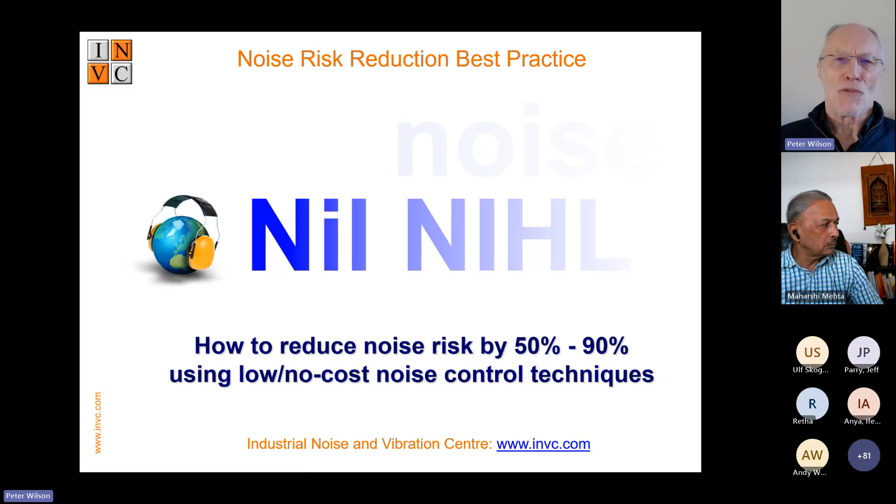So what I'm going to be doing today is talking about 4 of the elephants in the room as far as risk reduction is concerned. There's a phrase, don't mention the elephant in the room - it's a very obvious thing, but no one mentions it because it's embarrassing. So I'm going to be talking about the 4 elephants in the room of noise risk reduction, but mainly about noise control.

So current risk reduction practices worldwide have failed. There's still millions of people getting hearing damage. In the UK, there's a tsunami of hearing damage claims. And this is all despite the fact that noise-induced hearing loss is 100% preventable. The reason people are still going deaf is because people aren't implementing best practice and making sure that people are actually protecting themselves.

Recent research has really made this more urgent in the fact that, for example, over the last few years, there has been a lot of research on the links between dementia and hearing loss. Mild hearing loss doubles your chance of developing dementia. For moderate hearing loss, it's a factor of 3. And if you have severe hearing loss, you're 5 times more likely to develop dementia.

Noise-induced hearing loss, or hearing loss, is the single most modifiable risk factor in you developing dementia. It's very close to my heart - my mother is dying of dementia at the moment. It's just one of those factors that your hearing is such an important part of your brain activity. When you lose it, you are likely to get dementia.

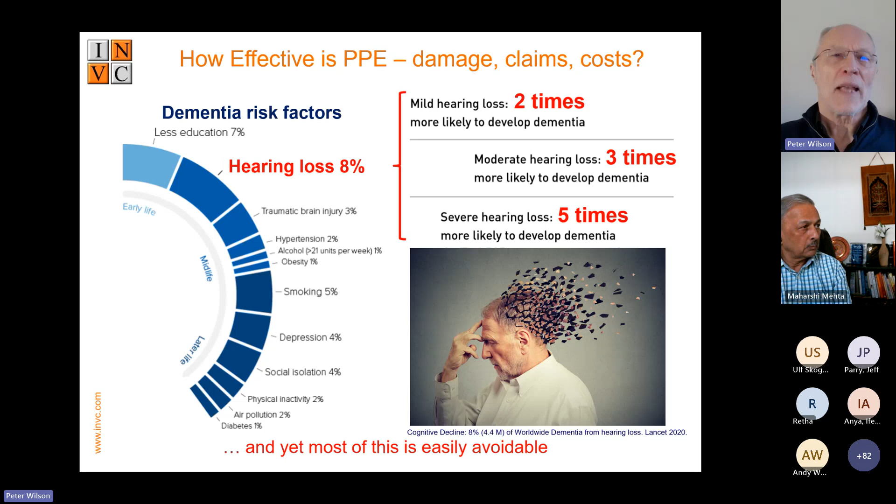So this is absolutely a massive thing that people don't normally consider. People normally just talk about hearing loss, but this is another factor that is extremely influenced by any noise-induced hearing loss. In addition, in the UK, the statistics for other factors involved in hearing loss show that if you have significant hearing loss, you are 42% more likely to be unemployed, 8% more likelihood of early retirement, and you double your likelihood of having a significant accident.

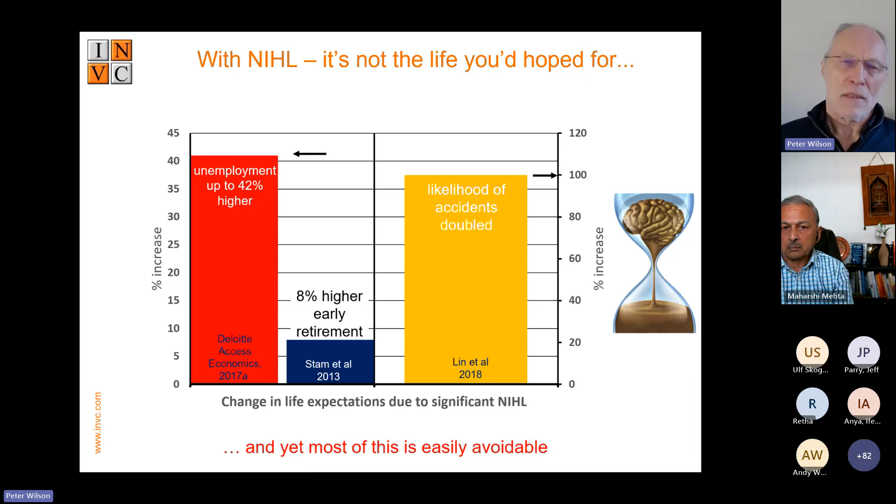So these are all, if you like, outside of the normal consideration of hearing damage. People just say, oh, you're losing your hearing, speech is more difficult to understand, you get tinnitus and so on. But these are other factors that also affect your life. So these are very serious things.

Noise exposure is costly in terms of health. It's also costly in terms of money and company expenditure on resources to reduce risks. So the costs to operators and staff include noise-induced hearing loss, tinnitus, dementia, and the other things I've talked about.

Direct costs, so financial costs, the cost of PPE - the direct costs of PPE and the indirect costs. In other words, how much attenuation do you actually get from your PPE? There are also costs involved in audiometry in most countries, in that you have to carry out audiometry.

Unfortunately, traditional audiometry is not a useful risk reduction exercise. It's a checkbox exercise. Motivationally, perhaps it's useful, but not otherwise, not using conventional audiometry. There are also the massive hassles associated with noise risk management, policing, claims, organizing audiometry, and so on. There's also the personnel involved.

High noise levels make working conditions worse and make communication more difficult. In addition, there's also the fact of risk assessments, the ongoing costs of getting reports. And unfortunately, the noise industry is predicated on measurement.

Fundamentally, a lot of organizations get regular noise reports that just tell them what they already know. You still have a problem, and it's more difficult to tackle those problems.

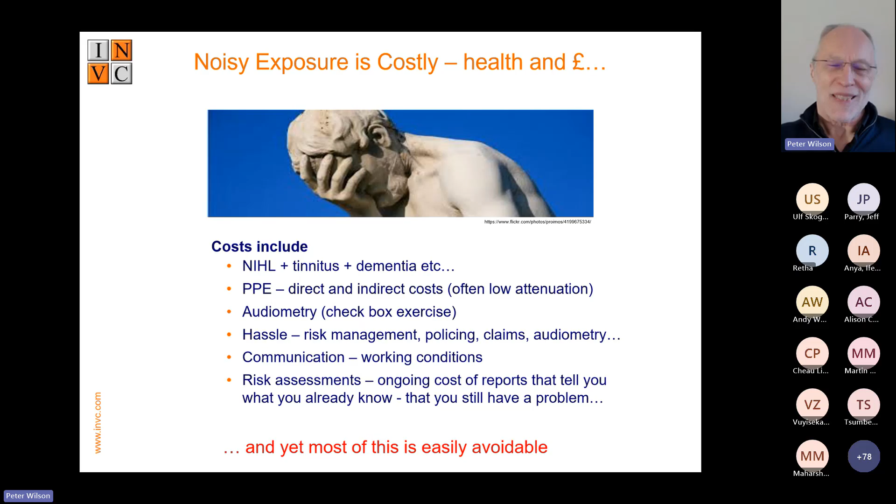So looking at the 4 key elephants in the room that people get wrong or don't discuss. Risk assessments for a start. That's the preliminary thing: how risky is it? Why do we keep repeating risk assessments over and over? Most risk assessments are very poor quality placebo exercises. In the UK, HSE research says most noise reports are inadequate, which is politely saying they're not good at all. We see a massive number of reports because of the training courses we run, and I completely agree with the HSE: the standard reporting is terrible.

Hearing protection is the first aid measure that is always introduced, and most hearing conservation programs are based on the use of hearing protection. There are huge assumptions that are just wrong, so people suffer unnecessary damage without knowing it because they assume they're sufficiently protected.

Noise control is an enormous factor because most people assume it's not practical, since the knowledge of modern low-cost noise control engineering is frankly abysmal. As an engineer, I find it really, really depressing. So I'll be talking about that mainly today.

And audiometry, if I mention that, it's largely a placebo checkbox exercise, but it doesn't have to be. It can be made useful, and there's newish technology now available that really helps with that.

So starting off with risk assessments, this is an index of one of our comprehensive risk assessments, where a company really wants to start from scratch and get everything down. The bit that's missing in virtually all risk assessments is a noise control audit. You just don't get any information at all about noise control other than copy and pasted stuff from the internet. So I'll be talking about that mainly today.

One of the things you need to do for risk assessments is what we have at the front of the assessment: a 1 to 2 page action plan document. The only reason you're carrying out a risk assessment is to work out what you need to do to reduce the risks. So the action plan we pull out can be put on someone's desk. This is what you should be doing. It's simple, it's not scary, you don't have to read much, but we have links to the page number, the due date, who should be doing it, and when it's completed. So you're keeping track of what actions are taken.

In addition, most risk reports are just not useful documents. They're written perhaps for people who like to show how much they know about noise, rather than for a manager who knows nothing about noise and just wants to know what they're going to do.

So this is a video extract showing one of our risk assessment reports. Basically, for a factory, it's based on the factory plan. What we have is a PDF document which has got all the information you need on it. It's got noise levels, color coded, so if it's red, it means the noise dose is above 85 and hearing protection is compulsory. There are also pictures to remind people which pieces of kit should be there, and you can also have sound samples.

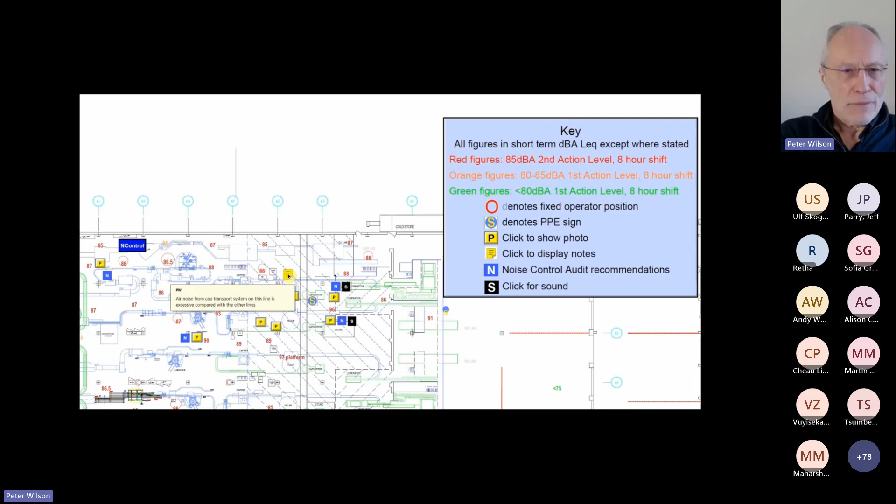And comments - in this case, this line is particularly noisy, but there's also noise control information. So in this particular case, this conveyor's noise can be reduced by 12 dBA at a cost of about £200, and it also reduces the wear in the conveyor.

So this is a document designed for the engineer implementing the noise control measures. There's a comment section here, and also material suppliers, so when they're doing the work, you can capture their expertise of how they fixed the problem in notes from the engineer. So when that engineer moves job or leaves, follow-on engineers can copy what they did on other items of plant and learn from what's been done in the past. It's turning it into a useful document.

As far as PPE is concerned, these graphs are from 1996, so this is a long time ago - nearly 30 years ago. This knowledge has been available for all that length of time, but virtually nobody makes use of it or even really understands it. So the top one is earplugs - in yellow, we have the manufacturer's data, attenuation between about 15 and nearly 30 dB.

In red is what you actually get when you measure it, and that's as low as 2 to 3 dB. So basically for these earplugs, you're talking about between 2 dB and around 10 dB if you're lucky. For earmuffs, the situation is slightly better, but it's still around 10 to 15 dB maximum, no matter what the manufacturer says. This is something that people don't discuss.

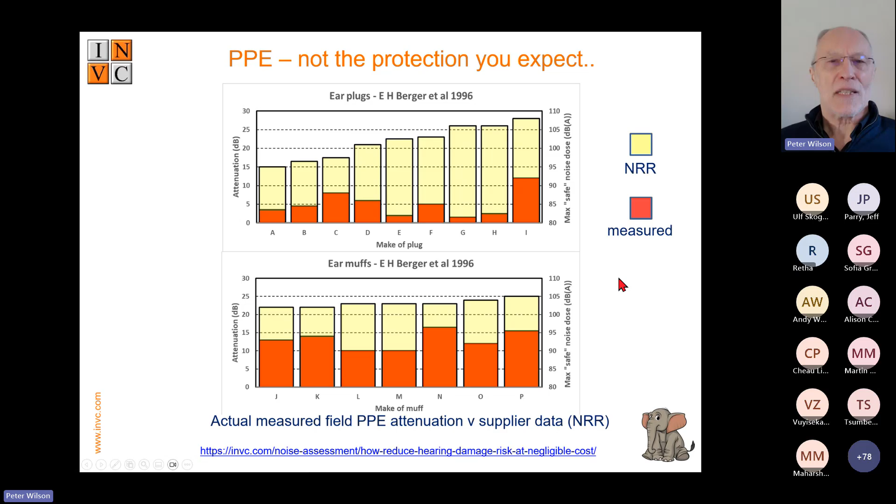The manufacturers know this, but they don't make it general knowledge. So it's a very serious issue that if you need 20 dB or 15 dB attenuation, you're only getting 2 to 5 dB in practice. This is a very serious thing.

So if we look at that, why doesn't it work? With earplugs, they're rarely fitted correctly because you need to put them fully into the ears rather than having them dangling out of your ear like a cigarette end. So 20 to 30 dB potentially from the manufacturer, poorly fitted, as low as 2 dB.

Earmuffs, there's less variation because it's easier to fit them correctly, but you can only really get 10 to 17 dB hearing protection, no matter what protector you use in practice.

The other thing is wear rate. This is one of the really key elephants in the room, because it should be 100% in a noise hazard zone, but it almost never is. And unless you know what the wear rate actually is, not what you assume it is, you have no idea of the protection you're getting. So these plots here are showing you the sort of noise level.

From the manufacturer's data for plugs, you're expecting 15 to 30 dB, and what you're getting is between 2 and about 12 dB. For earmuffs, you're expecting 20 to 30 dB, and what you're getting is about 5 to 15 or 16, 17 dB.

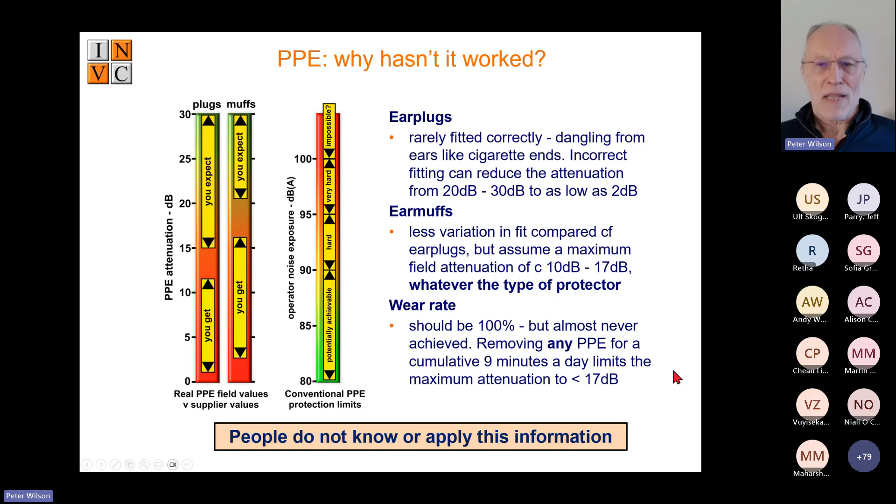So what this means in practical terms is up to 90 dBA, hearing protection is potentially achievable with reasonable enforcement. Between 90 and 95 dB, it is difficult to guarantee adequate protection. Above 95 dBA, it's very hard, and above 100 dBA, it's virtually impossible. Not many people know this or really understand this or apply this information.

And one of the killers is the wear rate. This graph shows the attenuation you get. Along the x-axis, we have the number of hours in an 8-hour shift that you wear your hearing protection. So in practice, you're only ever going to get around 99% wear rate, which means for plugs, the maximum performance you can ever get is 10 dB, and for muffs, it's 17 dB.

If you take them off for 2 hours in your 8-hour shift, or you're just wearing them for 3/4 of the time in noise exposure, the maximum attenuation you can get is 5 or 6 dB. Doesn't matter what you're wearing. The wear rate determines your protection.

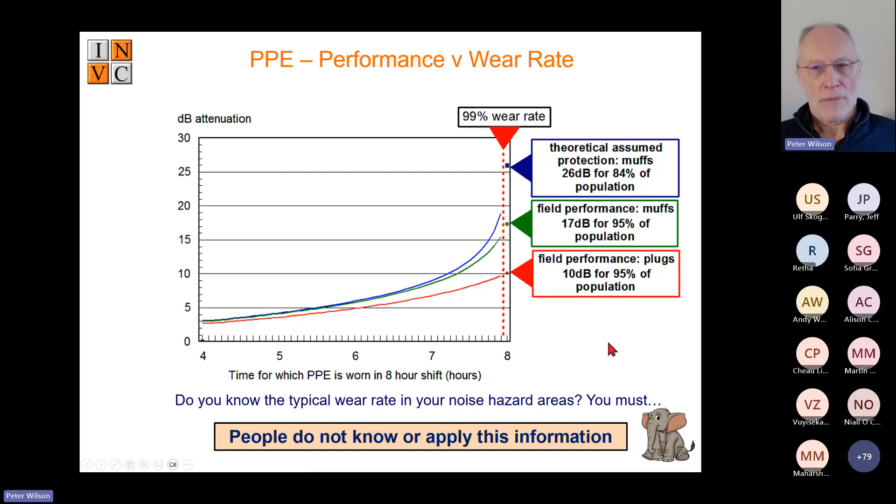Now, pure tone audiometry is, if you like, the gold standard that everyone uses. The trouble is, it simply catalogues that you've messed up - the fact that people have had hearing damage 5, 10, 15 years down the road. So all you can do with conventional audiometry is say, oh, I'm sorry, you've had hearing damage over the last 10 years. It's too late to correct that, but sorry about that. It's a lagging indicator, so as far as risk reduction is concerned, it's a placebo checkbox exercise.

It is useful in terms of motivation, in that you take someone aside every couple of years or so and talk to them about their hearing. But the results are that it will not pick up the early stages. So all you're doing is documenting the fact that someone has hearing damage or doesn't have hearing damage. In the UK, the HSE have said that conventional audiometry is a tax on the failure to control risk - it is not a risk management tool.

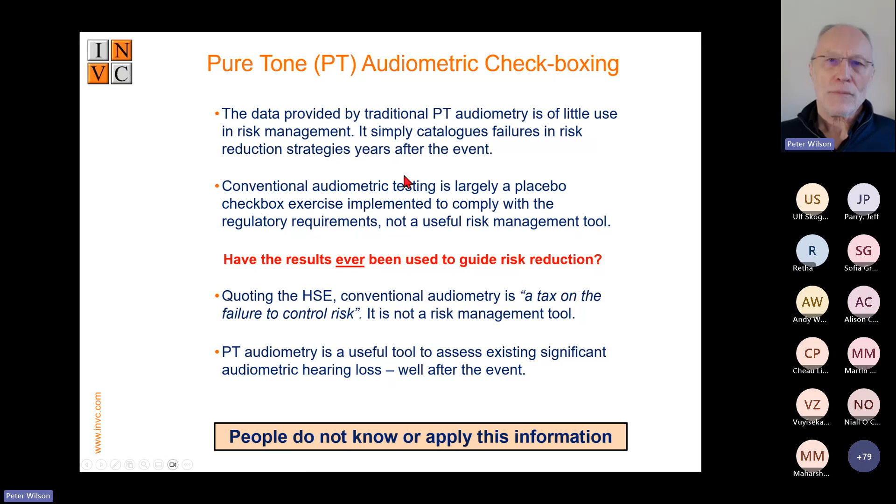It doesn't have to be. Instead of pure tone audiometry, we recommend, if you can, investigating otoacoustic emission. This has been used to test the hearing of children for decades. Now there's an industrial version, which has been around for a few years.

And the advantages are, if we're comparing conventional pure tone audiometry with OAE, OAE detects the very early stages. So you can say last year you had 12% damage to your hair cells, this year you have 18%. So you know something is going wrong within a year. You can then say, what has gone wrong? You're not wearing your hearing protection, or we haven't picked up a risk that you're getting damage from, and you can do something about it. So it becomes a risk management tool. It's also very, very easily understood - it's percentage damage.

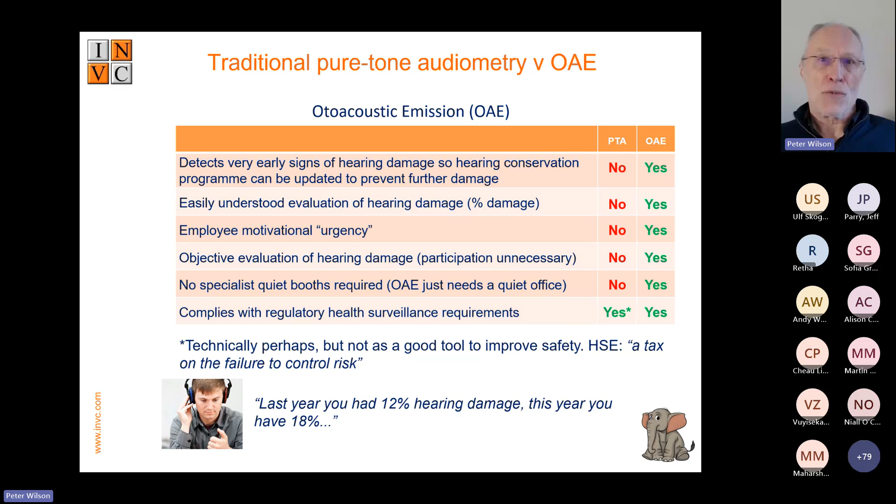It's very good for motivation because it's urgent - you have got this much damage since last year. It's also objective, there's no subjectivity about it. So you don't need to participate, you don't need to tell people what they need to do, you just press a button and it gives you the answer. You don't need quiet booths, it can be done in a quiet office, and it complies with all regulatory health surveillance requirements, as does conventional audiometry, technically speaking, but not in reality.

And now we come to noise control. Where you have a 3 dB rule, double the energy is double the risk, because risk is directly proportional to noise energy. So if you have a 3 dB exchange rate, which is the most common generally accepted one, risk is directly proportional to the total amount of energy entering your ears. 3 decibels is double the energy, so that's a 50% increase or reduction in risk. Every time you add 3 dB, you're doubling the risk.

So if you're looking at noise control, one of the problems is that people will say, well, it's 100 dBA, there's no point doing anything if I can't get it below 85, because at 85 we don't have to wear hearing protection. At 100 dBA, I can tell you those people are not adequately protected. If you reduce it from 100 down to 97, you have halved the risk. If you reduce it from 100 down to 94, a 6 dB reduction, you have reduced the risk by 75%. And a 10 dB noise reduction means you have reduced the risk by 90%. So if you can get it down from 100 dBA to 90 dBA, hearing protection is still mandatory, but it works - people can be protected at that level, whereas they cannot be protected at 100 dBA.

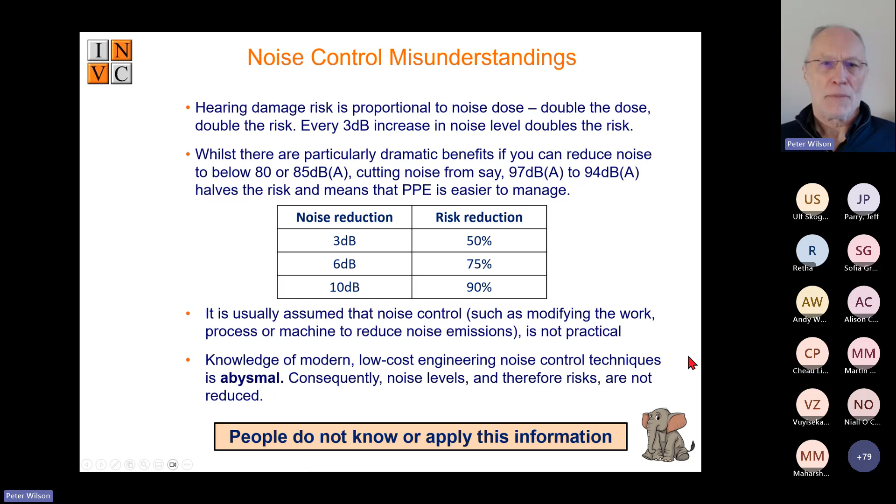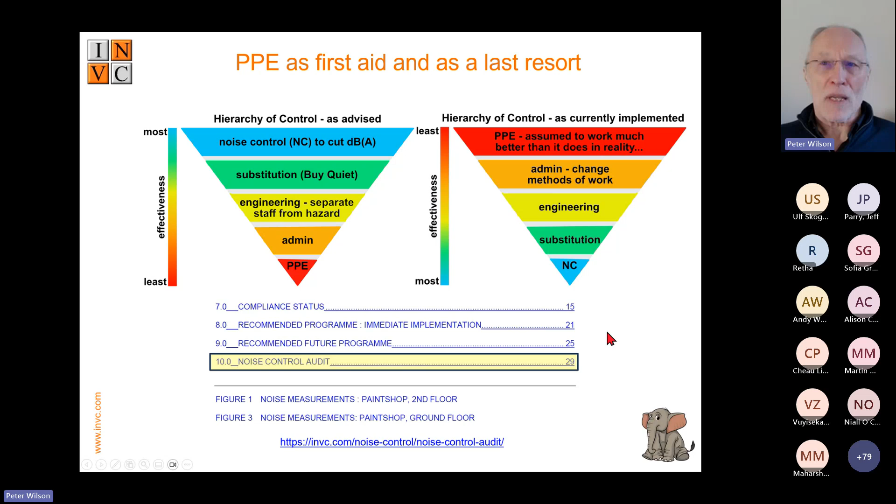As health professionals, occupational hygiene professionals, you know this hierarchy of control - the first thing you do is cut the risk. For noise control, it should be noise control, because that eliminates or reduces the risk. Then substitution, then separation, then admin, and then PPE as a last resort. For noise, it's the opposite way up - noise assessment reports will always say the first thing you do is PPE. Fair enough as first aid, but that's it. No one considers the other measures in any great seriousness in most circumstances. This is a big problem because PPE is not nearly as effective as people think in practice.

And the problem is attitude to noise control. A typical discussion you get in health and safety across the world is, let's look at noise. Noise has become a topic because you had a hearing damage claim, or it's just come to the top of the pile. So let's look at noise control. At the meeting, we've had quotes for enclosures, and they're exorbitant, massive costs, and the maintenance engineers would hate them, and hygiene would be a big issue, and so on. So it's not going to be practical. Moving on.

There's a tendency to regard noise control as a safety issue. It's not a safety issue - identifying the risk is a safety issue. As soon as you've done that, it becomes an engineering problem that should be addressed by engineering means, and that means accurate diagnosis. Again, virtually everybody involved in noise will look at a machine or a noisy line and treat it like a black box. That's it. They don't look at it as an engineer and ask, why is it noisy? And that's the key thing.

So for noise control to be effective, you must look at all the options, not just the high cost conventional palliatives such as enclosures and barriers and silencers. You should only use those palliatives when you can prove there's no engineering alternative. And all these techniques are additive.

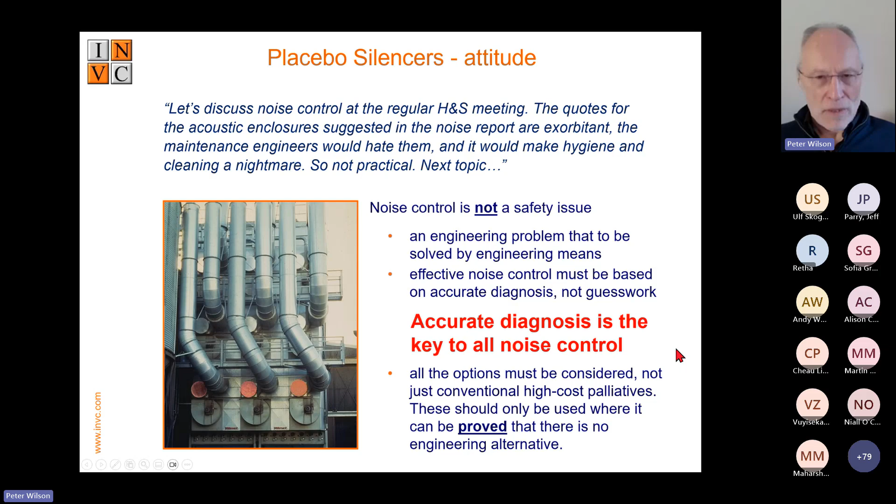So to evaluate what your noise control options are, you need to carry out a noise control audit, which is a cost-benefit analysis. This is taken from a previous project. There's a site with scrap fans pulling things off the lines, crowding conveyors, filling machines, sorter capping machines, cartoners, and palletizing. Current noise levels shown here are pretty high, up to 98 dBA.

One of our engineers went on site and did diagnostic measurements and worked out what the noise control options are and what the cost would be. So to get the noise level down from 98 to 76 cost about £3,500, and so on. In each case, we're saying these are the predicted noise levels you can achieve for these costs.

If you add all that together, you get the total cost of the noise control program, which would give you a maximum noise level of 83, down from 98, and the estimated annual maintenance costs are around £3,000, but you'd be saving £1,000 on compressed air.

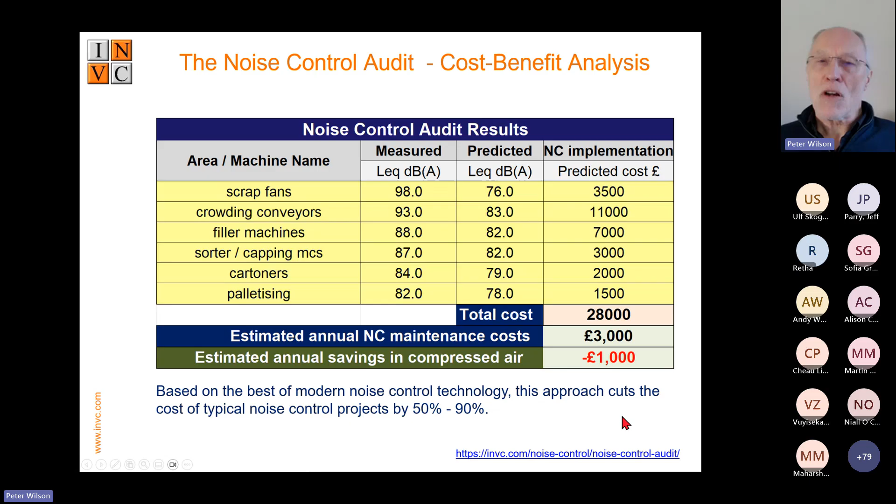So then you know what the cost is going to be, and you know what the benefit is going to be. In this particular case, when you worked out the noise dose of the people working in these areas, all the noise doses were well below 85, and most were well below 80.

So in most areas, hearing protection would no longer be required at all. You then look at the real costs of PPE. The first thing we do is use a real-world PPE performance calculator. In this case, you put in the type of muffs - these are ear muffs, and the manufacturer's data says 24 dB.

The wear rate we've seen is 70%. They're wearing safety glasses, they've had fit testing. The cost per head per annum is £180, and the number of staff wearing them is 50. So the total capital cost per annum is £9,000.

But you're only getting about 5 dBA noise reduction. So you say, okay, I'm spending £9,000 a year and I'm only getting 5 dB.

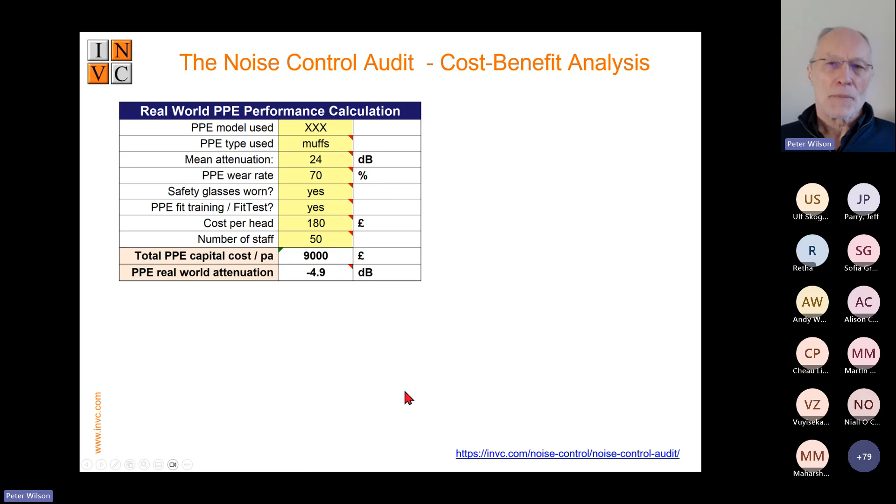And if you put that cost figure, and then add in the other costs such as noise surveys per annum, audiometry per annum, admin per annum, insurance per annum - the increased insurance cost because you've got noise problems - any claims, staff turnover and absentees, you can put in some notional figures for that, and it comes out to around £15,500 per year.

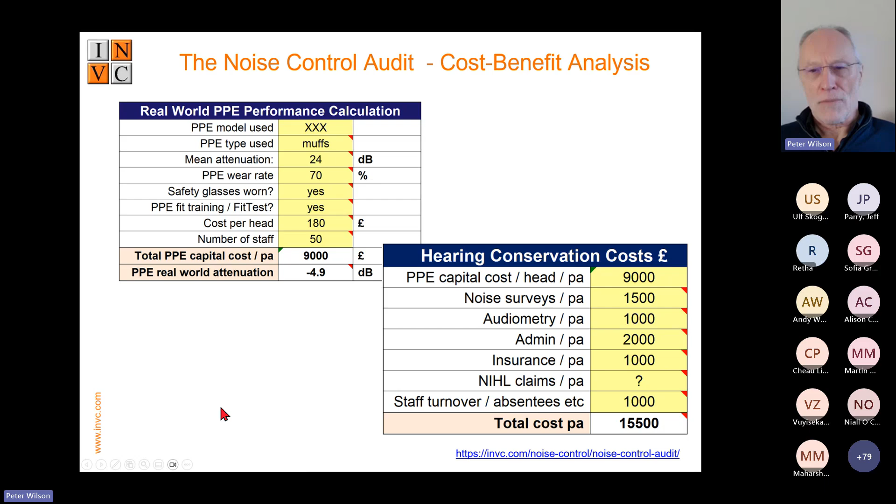So you've worked out the cost of the noise control, you've worked out the cost of PPE and the benefits of PPE, and you can then plot this on a graph. This graph shows years against cost.

So what we have is the noise control cost in blue, with the maintenance costs adding to it. The green line is the cost of having a noise control program implemented over the next 6 years, and that means no mandatory hearing protection anywhere.

And then you do the same for the PPE costs, which gives you the red line here. You can see the crossover point is about 2.5 years, which means after 2.5 years you're going to be saving money by going down the noise control route.

You also have to bear in mind that these PPE costs are for about 5 dB attenuation as found. So that would need to be improved, meaning you'd have to spend considerably more money, time and energy to improve that.

So that's what you're trying to do - you're trying to say, what are my noise control options and what would the cost be? With that information, you can make a judgment about spending money on PPE and noise control, or a mixture of both. What is the best option to reduce the risk to a minimum?

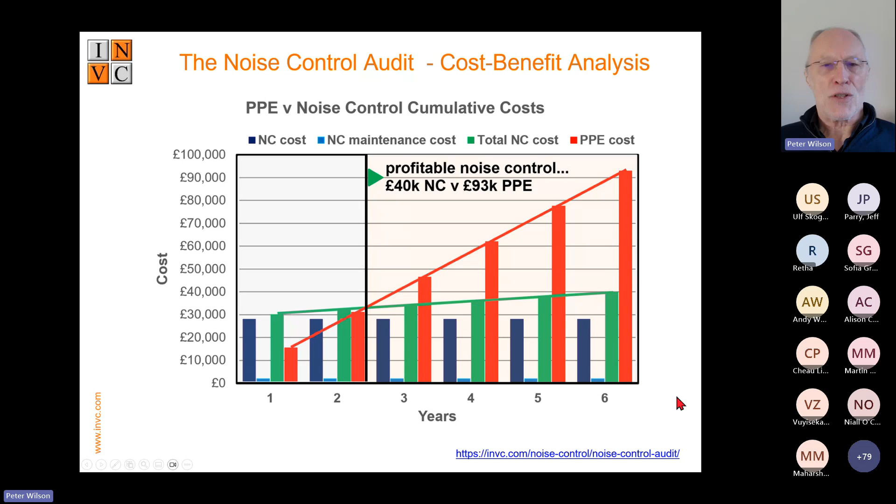Now, as far as knowledge of noise control is concerned, a few things that most people don't know: you can cut fan noise at source without using silencers by increasing fan efficiency. That's our first step when we are tackling fan noise problems.

There are also new materials. There's metamaterial barriers, which are amazing devices, 25% open area. They use geometric noise cancellation to stop the noise. So you can get 10 or 20 dB attenuation, but you're allowing 25% of the air through, so you can get cooling.

On air noise, silencing and nozzles, particularly nozzles used for transport of materials and so on, you can reduce the noise by 90% and use 20% less compressed air. So it's actually profitable, you'd do it even if noise wasn't an issue.

You can also get waterproof and very hygienic acoustic absorbent now, so that's no longer a problem.

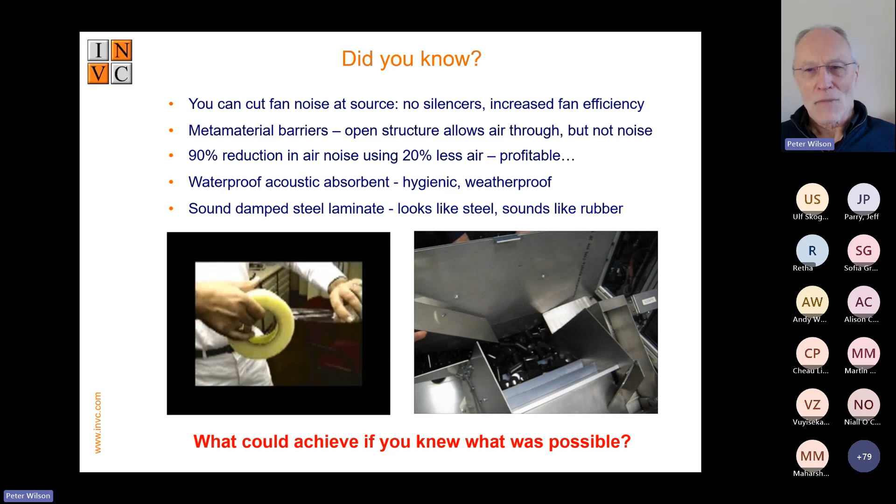And there's also, as an engineer, I really love this material, sound damped steel laminate. Looks like steel, sounds like rubber. I love it because it's very robust. You can swap it, it's a direct swap for a conventional steel sheet, or you can create it in situ. Here's an example of using a piece of sound damped steel against the deflector already in use on this machine. So all engineers should know about this stuff. It's only been around for 40 or 50 years, and it is used in automotive engineering quite a lot.

Another one I think is really cool, maybe I should get out more, but this is quiet sellotape, quiet tape. On packaging and cartoning, you think, why is tape noisy? Well, if you're cartoning and putting large strips of tape off a line, you can generate 100 dBA locally. Quite often, people are looking at fitting enclosures. Why not buy quiet tape?

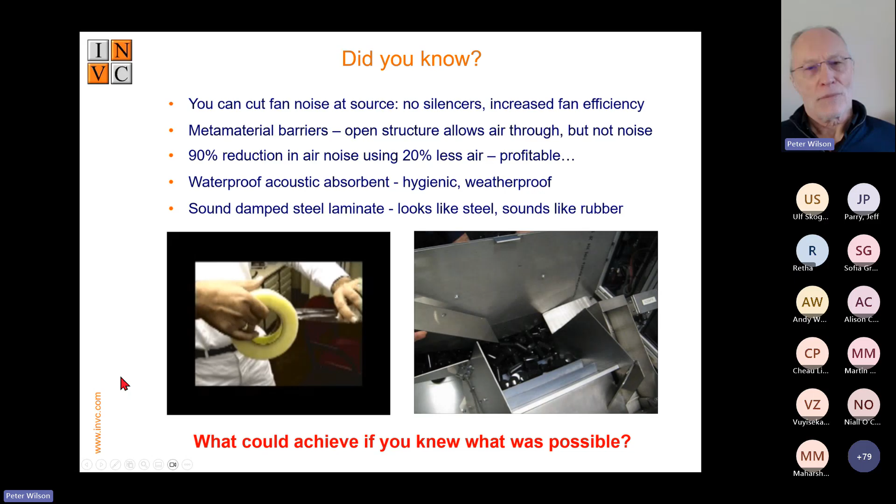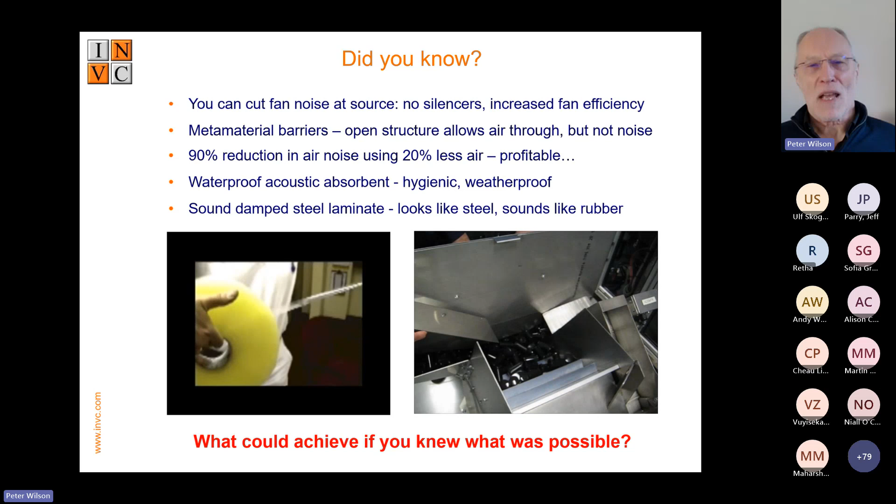Okay. Maybe I'm just very sad, but I think that's brilliant.

Also, when I set up INVC decades ago, we bought a narrowband frequency analyzer for diagnostic purposes. It cost the same as a small car. Now you can do it on a free app on your phone. So where you have noise that is tonal, the peaks in the noise at different frequencies can be related to mechanical activities such as gear mesh, fan blade pass frequencies and so on, and structural resonances. On a free app, you can determine what is causing that tone, what is causing that noise.

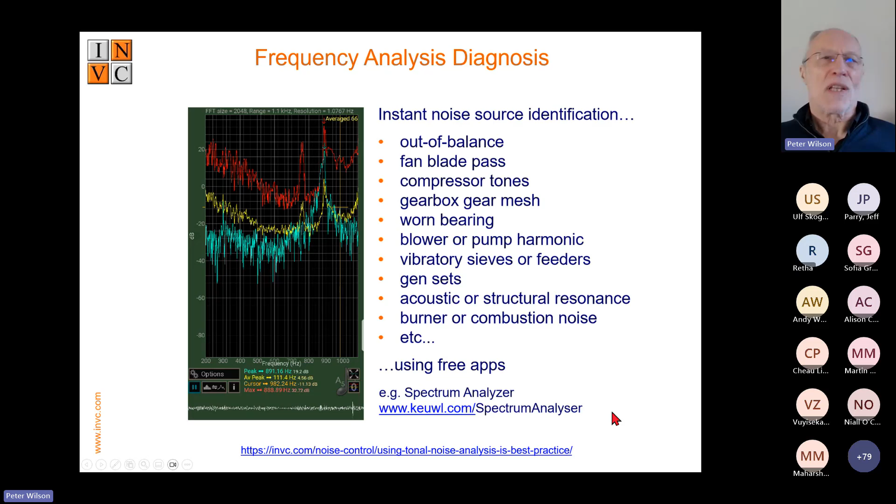We use this for diagnostic purposes all around the world. We do a massive number of projects now across the globe from our offices in Slough, just by analyzing smartphone data, or in this case, from a TV program.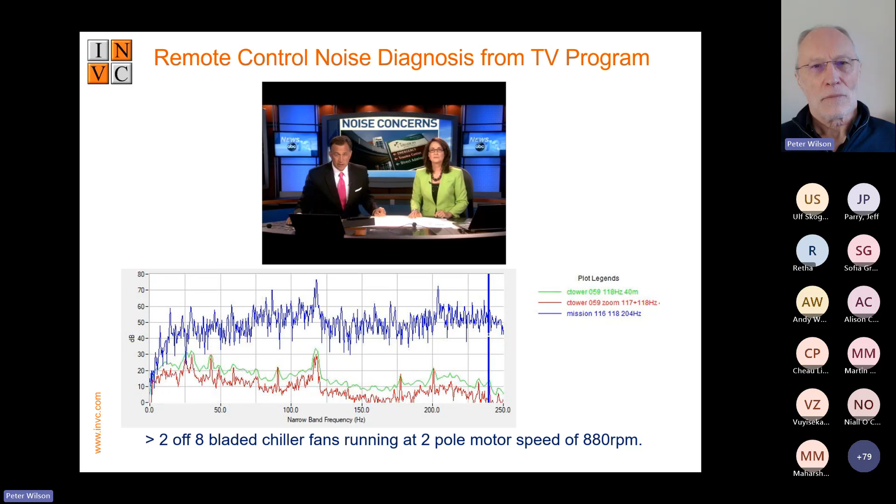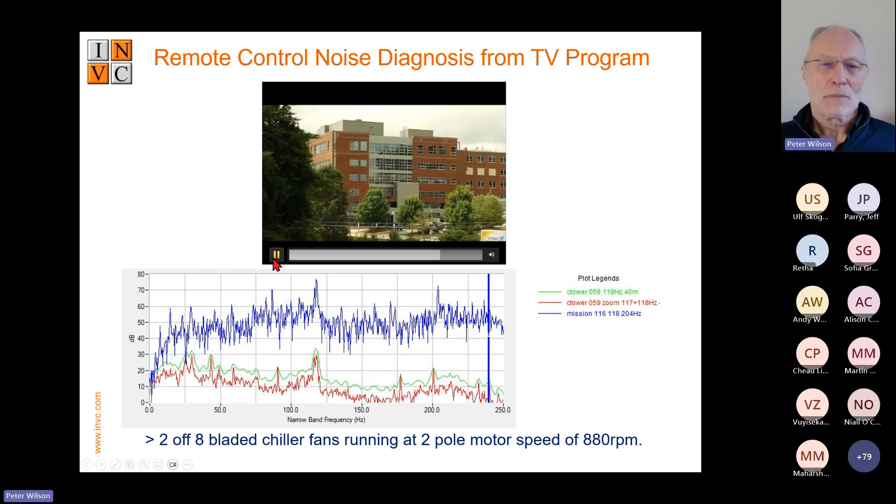Some homeowners who live near Mission Hospital say they're fed up with a constant humming. They also say Mission leaders aren't doing enough to fix it. News 13's Kimberly King talked with neighbors who are filing a complaint with the city. Listen closely, can you hear a constant hum? It's a sound residents say is coming from Mission Hospital.

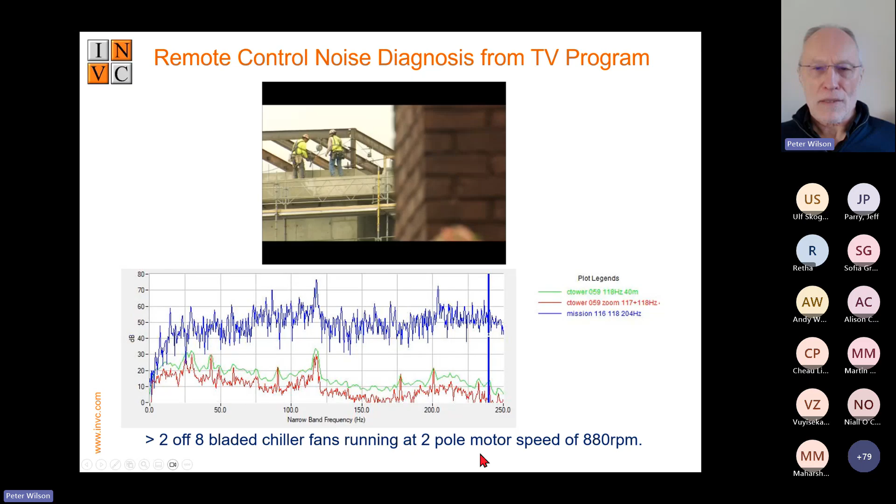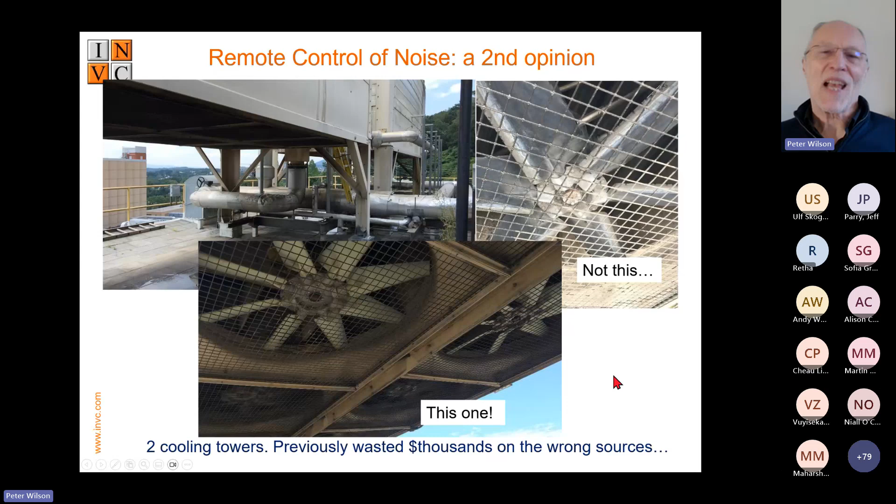From that sound sample, I did the frequency analysis and said, well, the problem is these two peaks here. I contacted them, and I had predicted that it would be 8-bladed fans, two of them running at a certain speed, and they had spent a lot of time and money on the wrong piece of kit because they hadn't done the diagnosis. So it wasn't these chillers, it was these chillers. That diagnostic, me spending 10 minutes analyzing that, told me exactly what the noise source was.

This is another example, the fastest noise control project we've ever done. Took 6 hours from the first phone call to the problem being completely diagnosed and them knowing exactly what they needed to do. This is a cooling tower.

They sent me a video clip, and from the analysis close to the tower at a distance, the problem is a tone at about 650 hertz, which was tied into the gearbox of the cooling tower. So once that had been done, instead of spending over £30,000 on replacing the whole unit, they just needed to replace a gear, which cost them £3,000. And that was all completed within 6 hours from the first contact.

This is an incredibly powerful diagnostic technique.

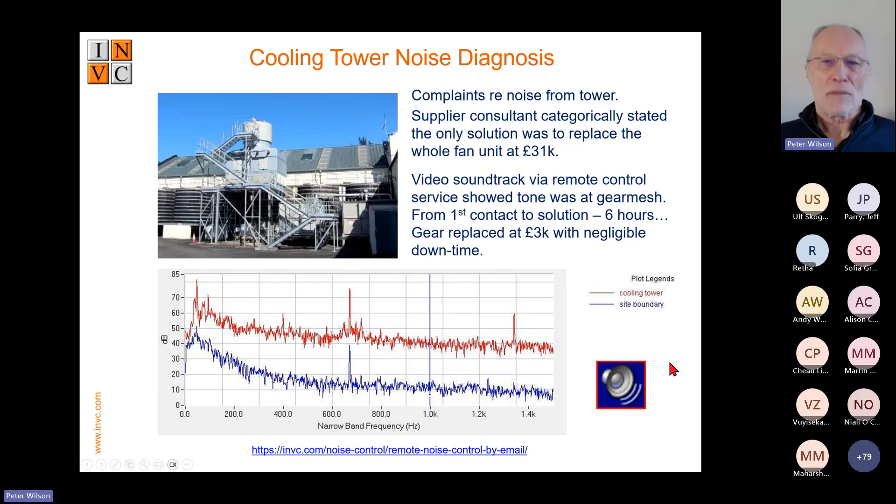As far as diagnosis is concerned, it's a way of thinking. You look at your noise sources and you say, why is it noisy? You need to rank the noise sources on your machine, your line, or your plant. Listen: does the noise happen at the end of the cycle, the beginning of the cycle? Is there a hum, a whine, a drone? A lot of engineers have used this for years - you've got a problem on a gearbox or an engine, you stick a screwdriver in your ear and listen to it, and you go, ah right, okay, is that a bearing?

Or you can run each source separately. On some machines, when you press the start button, the fan starts up, the motor starts up, and various other things all start at once. If you can get an electrician to massage the interlocks and try and run each bit separately - run the motor and gearbox, then separately run the compressed air, and then run the extract fan separately - you can say, right, which is the noisiest? Because the key thing is you start with the noisiest noise source and work down the list. Otherwise, you're not going to be successful.

Another thing you can do is buy acoustic matting and cover all the sources. This is a bit like a children's program where, with a pair of scissors and a Stanley knife, you make covers for each noise source, cover them all, and then uncover each one in turn. That tells you simply which is the noisiest part of the machine.

The power of this is illustrated by what would normally be considered a very difficult noise problem. This is a big power press. You've probably all lain awake at night wondering - if you've got a washing machine and you look inside, there's a perforated stainless steel drum - what machine puts all the holes in the stainless steel they make the drum from. Or maybe that's just me. So this is a machine that does exactly that.

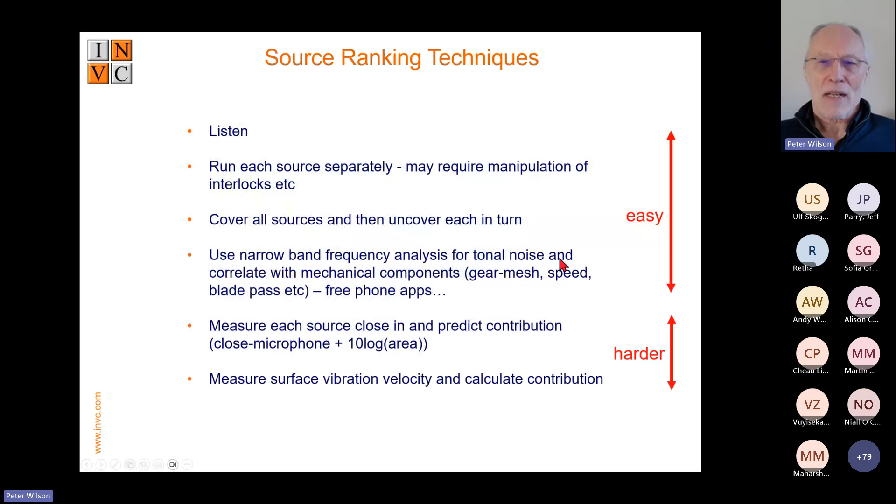You feed in the stainless steel sheet and it stamps out the holes. Now, this machine is generating 102 dBA, which means the whole area with a load of staff are all affected by the noise, not just the operator, and all have to wear hearing protection all the time. Now, the company were thinking of fitting an enclosure, which would have cost tens of thousands of pounds. They asked us to see if there's an alternative, because it would have been a big hassle and very difficult to operate with an enclosure around it for access and so on.

So the first thing to do is work out and make a list of the noise sources. We have the tooling banging away. We also have a pneumatic clutch that is operating the tool as well. You also have an extract fan, which is pulling out the scrap, and we have a separator that pulls out the scrap from the outlet of the fan.

So the first thing to do: run the press without the feed going through it. You can run everything else, and that's by far the dominant noise source. So we tackle that first.

With tooling modifications, which is really just regrinding the tool and modifying it slightly, we're down from 102 to 97 dBA. A good start.

But then the clutch is the dominant noise source - it's compressed air from this very bad silencer. So fitting a much better silencer, a straight-through silencer with no back pressure at all, fixing that, we're down to 95.

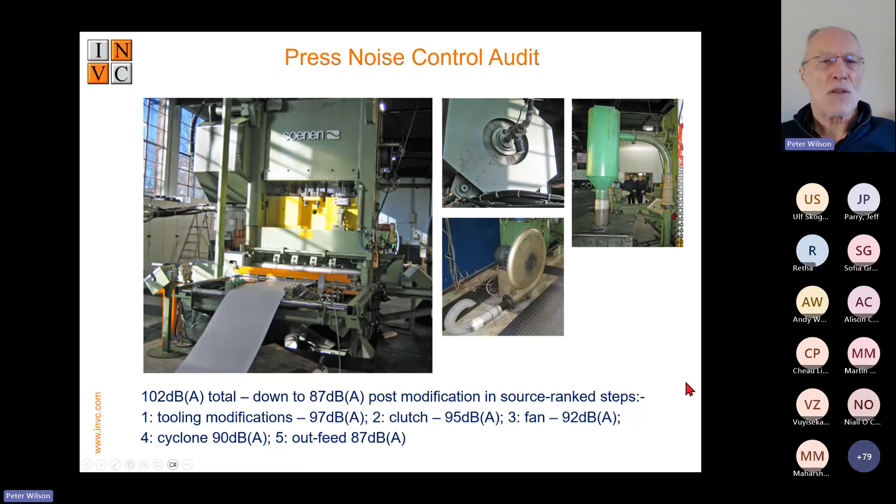So we're down from 102 to 87 dBA, which means you only need to wear hearing protection compulsorily within 2 meters of the press. The rest of the workshop is no longer a mandatory hearing protection area. And that lot cost a tiny, tiny fraction of an enclosure - instead of spending 40 or 50,000 pounds, it cost them about 5,000 pounds.

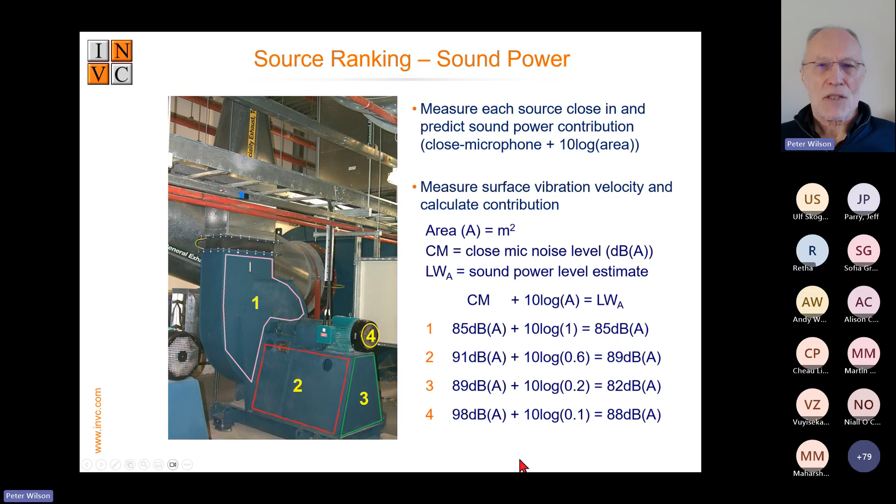So we're looking at using modern engineering noise control techniques, giving 50 to 90% cost savings - typically it will cost half as much or as little as 10% compared to using conventional noise control.

For pneumatic noise, you have zero back pressure silencers - there is no excuse for pneumatic noise from exhaust silencers, and I'll come to that in more detail a bit later on. If you're using nozzles, there are off-the-shelf nozzles that use 20% less compressed air and are 10 dB quieter or even more.

For weighing with hoppers, chutes and conveyors, we have impacts of products and so on. You can get 10 to 30 dB attenuation using damping, with no effect on maintenance, no effect on hygiene, and it's very, very cheap.

For fans, you can do a lot without silencers by increasing efficiency and so on. And if you need silencers, there are various types - you can convert existing parts of the system into silencing components. Large power presses - I've already shown one example, and I can show you another example in a moment.

Vibratory feeders - very, very common - give between 5 and 27 dB attenuation with improved performance, so you're getting improved throughput. Typical cost, once you've done the first one, may be just a few hundred pounds.

For construction plant, simple mobile screens - you can knock the noise by 90%, by 10 dB or more, by fitting mobile screens.

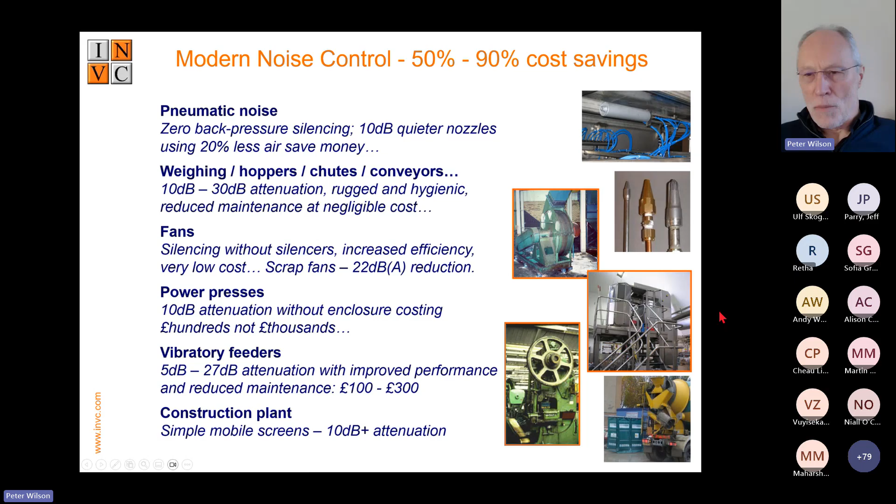So let's look at some of the things - this is available on our website in more detail, you can download the document, but I'm going to go through some of these. These are typical noise control solutions to very, very common noise problems across industry - the 10 most common noise control problems and the best solutions.

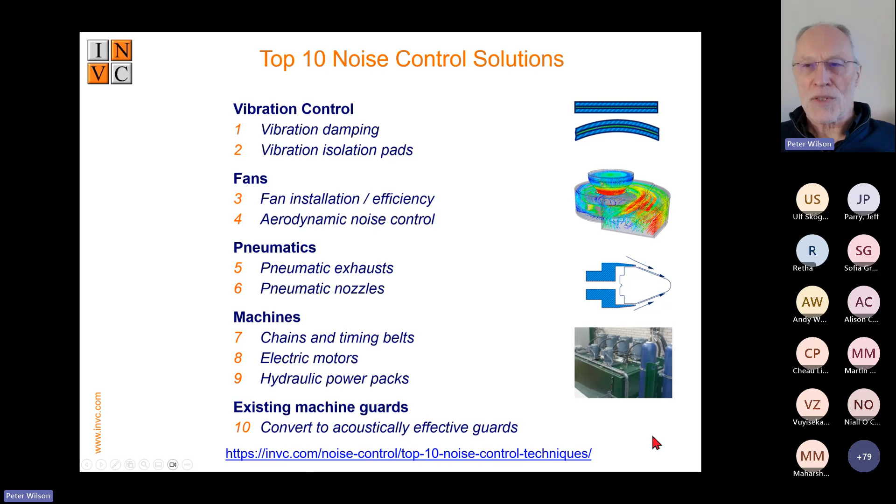So first off, any thin steel panel that is vibrating will radiate that vibration as noise. Now you can stick rubber-type damping material onto it, but that will come off - it's not hygienic and it's not rugged. You can buy off-the-shelf laminated steel, laminated aluminium, laminated stainless steel - I love it, it's cheap, it's very robust.

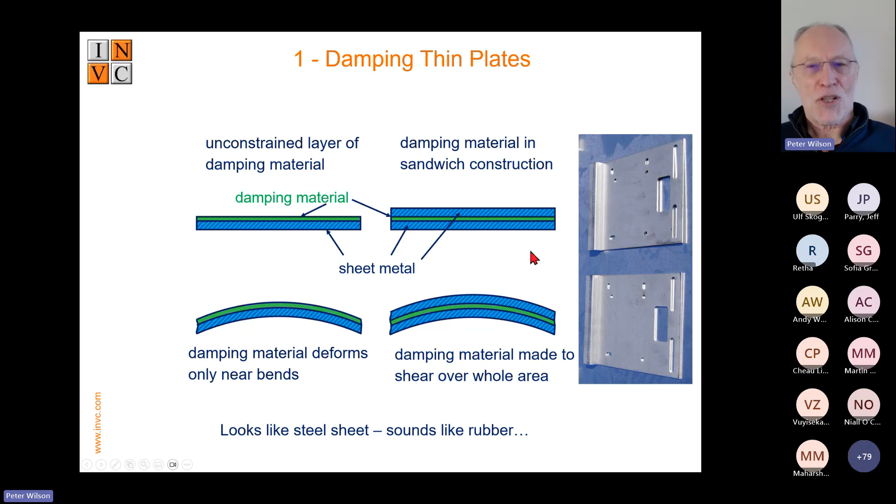It's also high hygiene. You can also create a laminate in situ - you can laminate an existing panel by using high damping adhesive and just sticking another sheet of steel onto it. So this is very cheap and very, very effective.

An example of that in use is weighing machines in the food industry. So this is a weighing machine, and underneath you have the bagging machine - you're weighing out set amounts of sweets or pharmaceutical products into containers. On the platform, with the enclosure, it's 94 dBA for the weighing machines.

Sorry - it's 94 dBA with the enclosure. This is a very sophisticated enclosure, and yet it's still 94 dBA. Underneath the enclosure, it's actually louder than without the enclosure, because the enclosure is funneling the noise down to where the operator stands underneath.

Now, we have a standard fix for this, which involves the laminated steel and a couple of other minor geometric modifications. So in this particular case, with the enclosure, it's 94 dBA. With our modifications installed, mainly damping plus a couple of geometry changes, we're down to 82. So PPE is unnecessary, and throughput is improved because you've got better access, better cleaning, and easier maintenance.

So across all weighing machines, typically they generate 87 to 98 dBA, and hygiene is often an issue.

Enclosures typically give about 5 dBA off, and it increases the operator noise level underneath, and it gives you all the maintenance and access problems. Cost £8,000 for a simple one, up to as much as you want to pay.

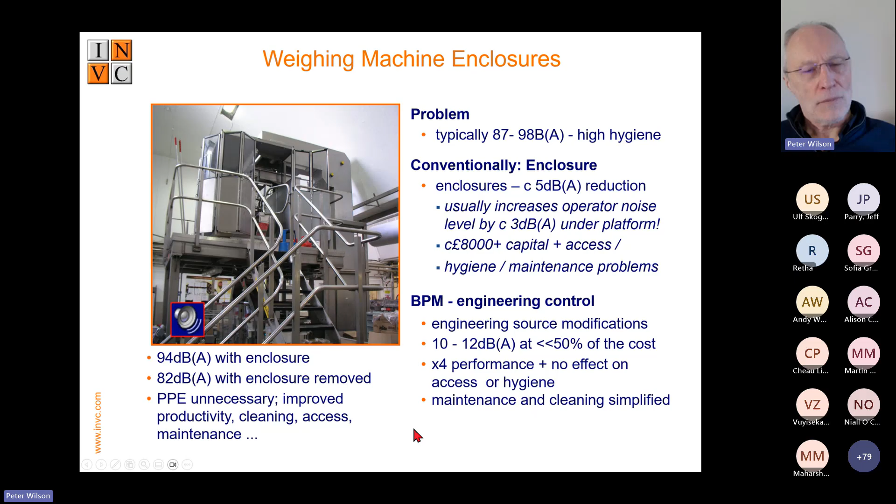And this is what it sounds like. So that's 12 dBA quieter.

This is a power station. These are big water pumps, very, very noisy close in, 95 dBA at a meter. Big argument between the supplier of the pump and the supplier of the motor - it's your fault, no, it's your fault, no it's your fault. So we were asked to look at it, and we got the data together.

Again, this was done remotely over the internet. Got them to do some simple measurements and send a couple of smartphone video recordings through. 100 hertz tooth comb, which means electrical vibration, which is being radiated by the thin metal panels on this big pump. So the thin metal panels were laminated, and 12 dBA noise reduction, very, very cheap, was done over a weekend.

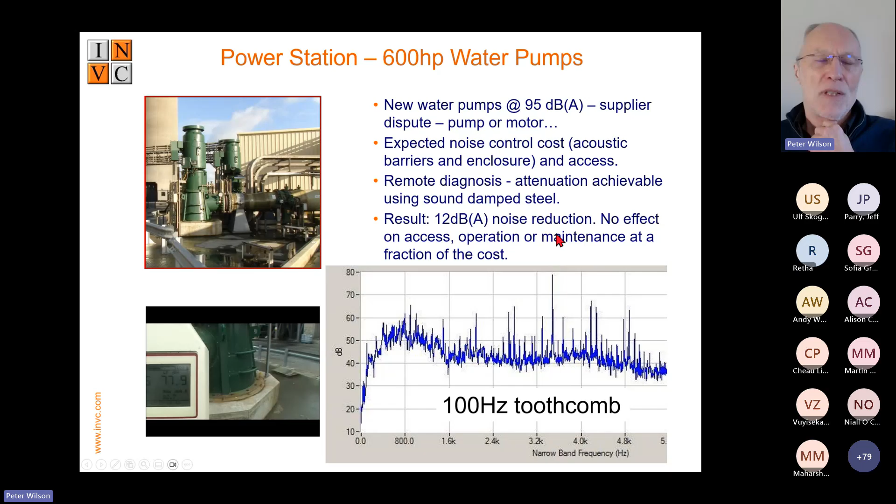You've probably wondered what makes the oil filter base plate on your car for the oil filter. It's a thick piece of steel stamped with holes through it. It's a large press. The manufacturer using that press was going to fit an enclosure, again costing about £35,000, but access is an issue.

So we looked at it and found that most of the noise is radiated by the flywheel. The flywheel is acting like a loudspeaker, ringing like a bell. So...

What we did was, in London, there's the Millennium Bridge, which is a beautiful structure. But when people walked over it when it first opened, they all started to walk in step, because the bridge started to sway at about 2 cycles, which is about walking pace. And so it swayed from side to side and was quite scary for the people walking across it. As soon as I heard about that, I thought dynamic vibration absorbers.

These are a mass on a spring with a damper. What it does is it sucks out the vibration at a particular frequency and converts it into heat, and it's very, very efficient. And they did that to the bridge. I think they should have not modified it - they should have charged it for it as a ride. But anyway, they fitted dynamic vibration absorbers, which cured the problem.

On the flywheel, we did some tap tests, worked out where to fit the absorbers. An absorber is just a lump of steel on a piece of cork, which has got the right thickness and the right area, bolted through the flanges of the flywheel. That gave a 10 dBA noise reduction and cost £20 in materials and a fitter for a day, and sounded like this.

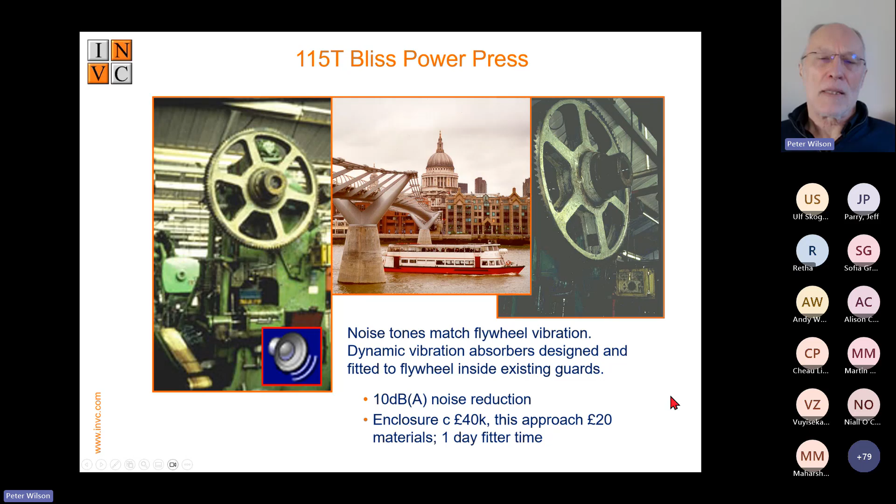So if you could isolate the motor pump unit, what you do is you buy in something like Tico pad - there's various manufacturers of this. This is rubber bonded cork gasket material of various thicknesses. We quite often see this used, and people will proudly point to their pump or their gearbox and say that's vibration isolated from the beam that's radiating the noise.

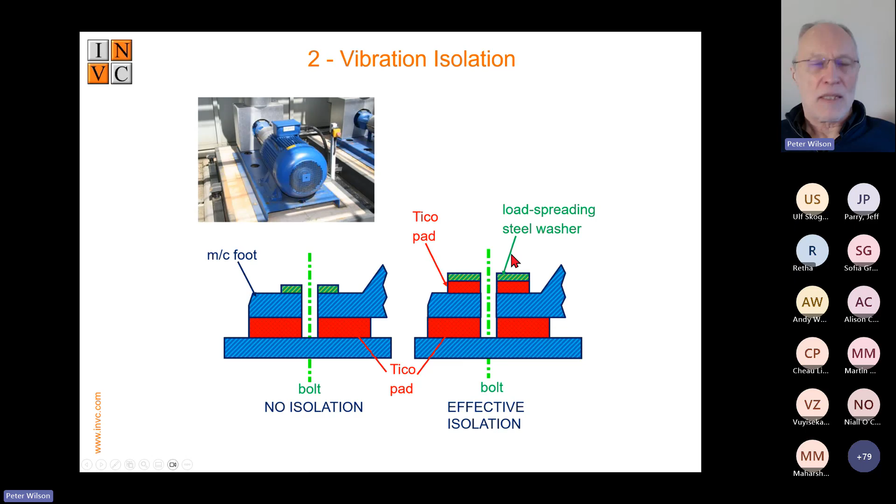So this one is isolated. It's very cheap, very, very simple. Takes out high frequencies and can reduce noise by 10 to 20 dB.

Axial fan installations, fans are a very, very common source of noise, both environmentally and occupationally. And noise is turbulence in the air.

So if they are impinging inside the duct, they will cause turbulence. If you have a damper, that will cause turbulence. So what you need to do as a rule of thumb is have 2 to 3 duct diameters of straight, smooth duct between anything that causes turbulence and the fan. This will reduce the noise dramatically. Or you can buy in quiet fan blades. They're more expensive and they do help to some extent, not massively, but they do help.

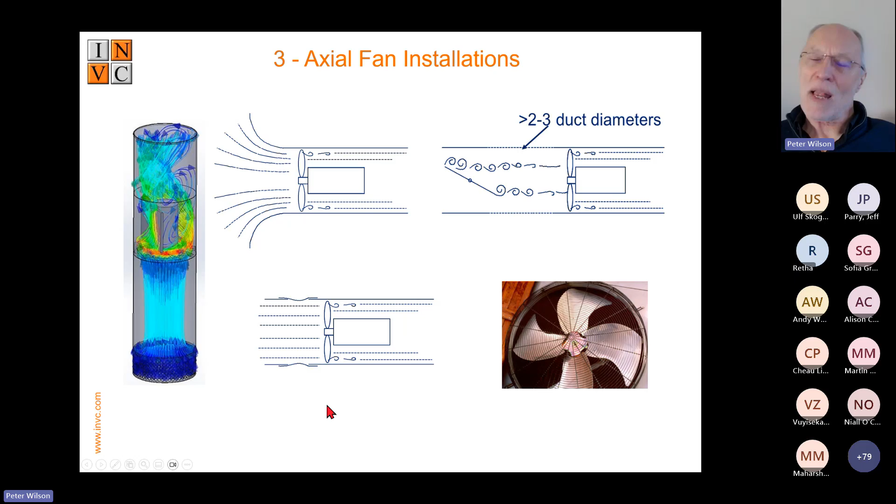The way we approach any fan noise problem is to try and make the system as efficient as possible. And the reason that's so important is because nowadays you can get variable speed drives quite cheaply. You can also, if you've got pulley driven fans, just change the size of the pulleys to change the speed. And the reason that's important is because fan noise is proportional to approximately the 5th power of fan speed. And what that means is that a small reduction in fan speed has a big effect on noise.

So if you cut the speed by 10%, you reduce the noise by 2 dB. If you can cut the fan speed by 20%, you reduce the noise by 5 dB. That's a factor of 3. So cutting the noise from a fan by 5 dB means you've reduced the noise risk by a factor of 3. You're down to 1/3 of the risk, and you've got a 20% reduction in fan speed and reduced power consumption. And you can see a 50% reduction in fan speed in your dreams - you get 15 dB off, which is a factor of 30.

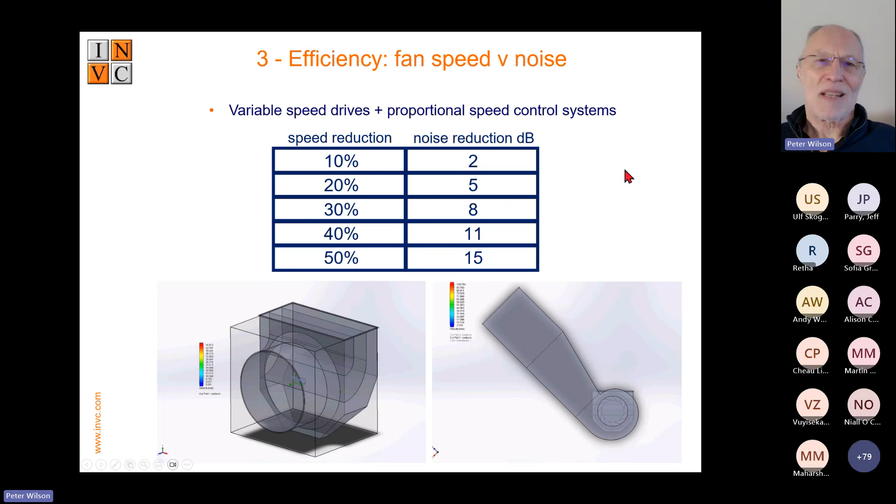So the first thing we try to do is to say, what can we do to improve the efficiency of the fan system to reduce the noise? The next thing we do is say, okay, can we introduce aerodynamic fan noise control? Because this cuts the fan noise at source.

We originally developed that for the Eurofighter project as a small fan in the ejector seat that fed the pilot, and they couldn't use silencers. So we developed aerodynamic inserts that fit inside the fan casing to cut the noise. And it can also increase efficiency in some cases as well. So where that's applicable, it's very, very cost effective. It's very cheap, easily retrofitted, and can give you efficiency improvements. If you can't do that, then you fall back to the conventional silencing, enclosures, lagging barriers, and building modifications.

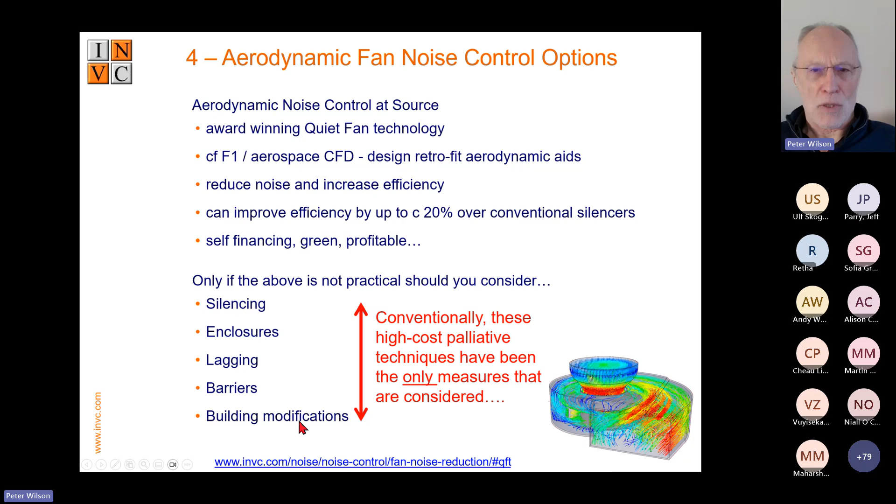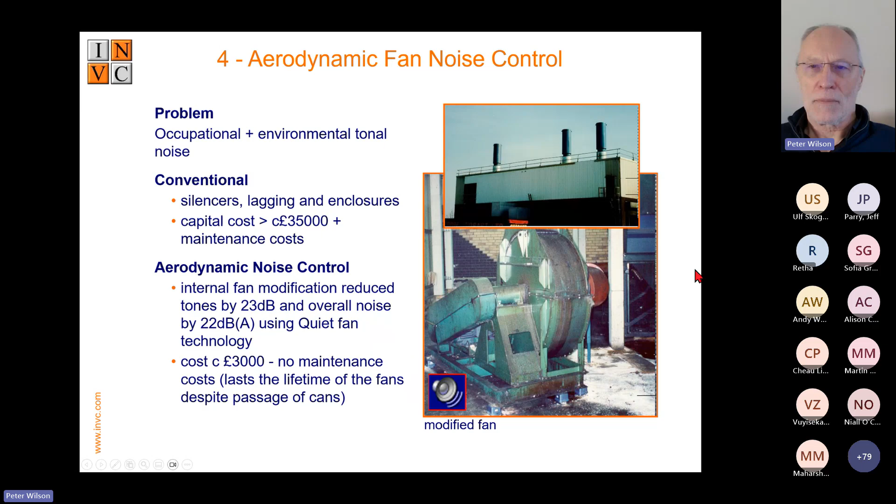Now, it was both an occupational and an environmental noise problem, 3 systems. They were quoted £35,000 per system for silencers, lagging, and enclosures. It has to be very, very robust silencers because aluminium cans are passing through them. We fitted aerodynamic noise control, which cut the noise by 22 dBA and cost £3,000 per system rather than £35,000. And it sounded like this. So where it's applicable, phenomenally cost effective.

This is a manufacturer who had an occupational noise problem. A dust control fan is used in factories where you have a lot of dust. You don't want to get the buildup of dust because it's an explosive risk. So they have these fans that are hung from joists. Very noisy - it was 87 dBA at ground level below the fans. And they wanted to reduce the noise.

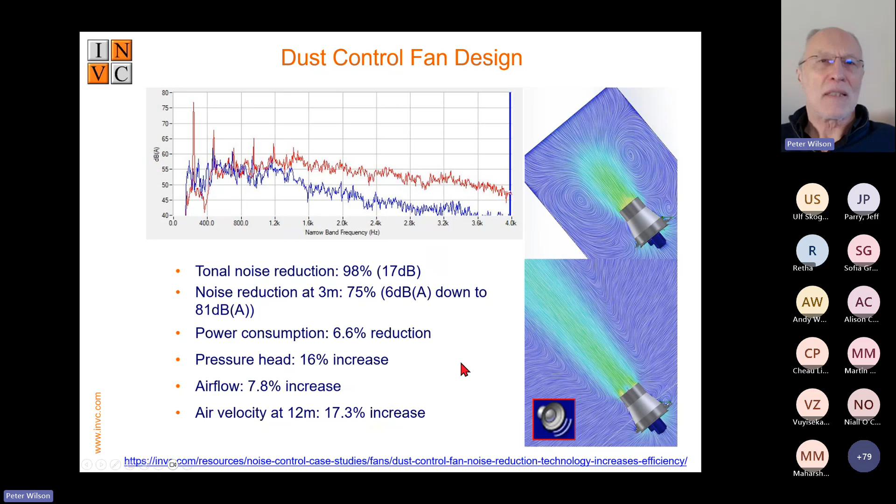The key thing is engineering noise control. If you do the diagnosis and you can do good engineering, there's the potential for a very low cost solution that also can save money and makes things more efficient. It should always be the first port of call.

I particularly like this one because it uses yogurt, and I don't know if any other noise controllers ever use yogurt. A colleague of mine was asked to look at these boilers, which had a low frequency noise problem. They were going to turn the boiler house into a bunker because of the complaints. He looked at the burner and said, I don't think the flame is stable. So he asked, have you got a yogurt pot? They went to the canteen, ate a yogurt, and he came out and modified a yogurt pot. They fitted it and it got rid of the tones, 16 dB off, just by fitting a yogurt pot.

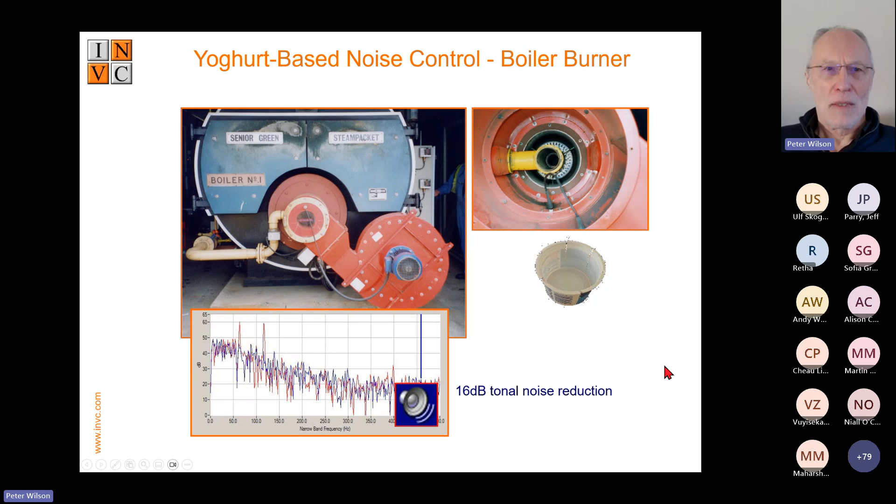They do have aluminium yogurt pots now, and the noise, you probably can't hear this because it's low frequency, and I don't know how good your headphones are. So these things are now run with aluminium yogurt pots, and before you ask, it was blackcurrant.

Pneumatic noise is incredibly common. Unsilenced exhausts can be 100 to 110, or even 115 dBA. That means 1 second at 2 meters from an exhaust is all you need per day to get your full dose. 1 second.

There are dozens and dozens of silencers available. Most of them are terrible. One of the problems with silencers is, unless your air is very, very clean, they will eventually clog. So they get removed, and that means you've got the noise back. So you can get zero back pressure silencers, so back pressure is not a problem. It's often a rumor that you can't have silencers on a machine because of back pressure.

So these are the practicalities. If a silencer is missing and there's 75 different silencers on your books, it's a hassle, and the machine still runs fine with no silencer. So what we tend to do is say, okay, the difference between having an effective silencing program and an ineffective one is you should standardize all your exhaust ports to 3 sizes and stock 3 silencers: big, small, and medium. So whenever there's a problem, you just replace the silencer. Very, very easy, and as I said, 0 back pressure.

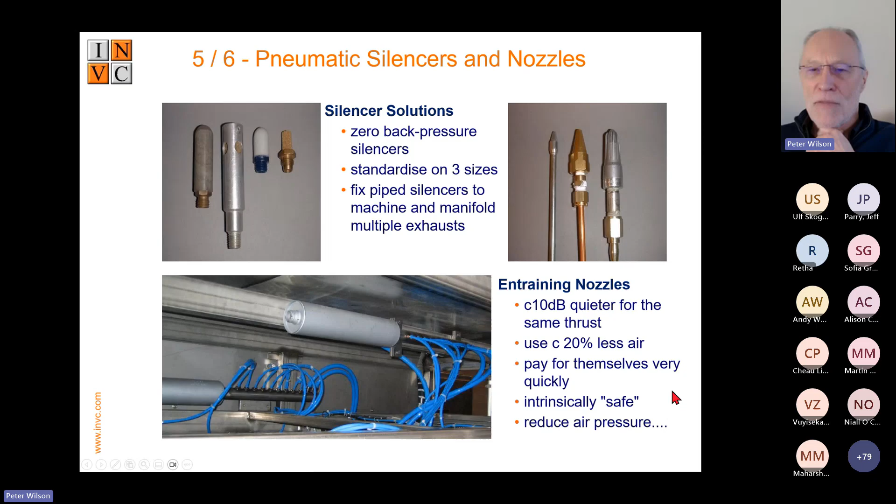If you're using nozzles for cooling, drying, conveying materials, knocking things off, whatever, standard nozzles are usually just copper pipes or something similar. You can buy what are called entraining nozzles like these. They are about 10 dB quieter, a 90% reduction in risk for the same thrust. They use 20% less compressed air, so they pay for themselves very quickly, and they're intrinsically safe. It's a no-brainer.

Here's an example used on toothpaste manufacturing. These 2 tubes are used to cool the plastic welding on the ends of the tubes. The tubes stand upright in these cups and it passes between these 2 to cool the welds. Very noisy, 94 dB, they'd go to fit an enclosure. We designed entraining nozzles which cut the noise by 12 dB and use 20% less compressed air.

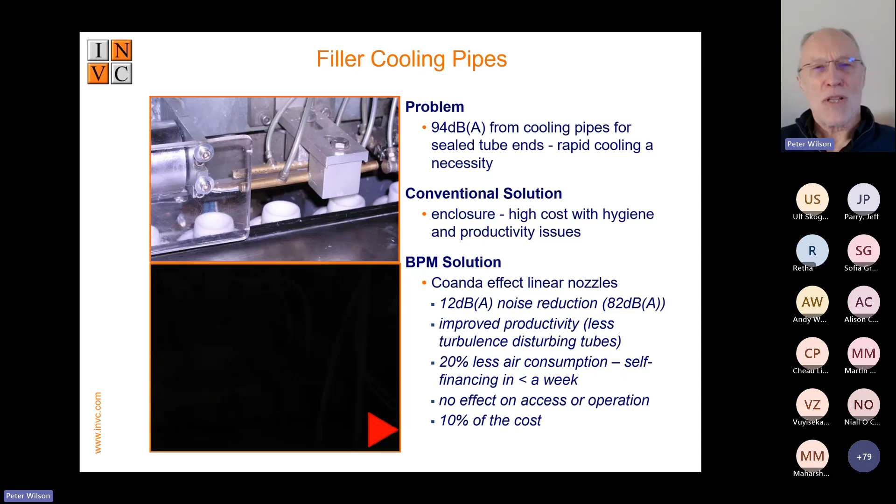Again, it's looking at a noise problem in a way that says, why is it noisy, and trying to fix that. These things are available ex stock, off the shelf.

Another common noise source is chains and timing belts. With chains, they usually get loose, so the return feed may be noisy. You can fix that with laminated steel guides so it's not rattling against guards and things. With tooth belts, the noise is caused by the expulsion of air from between the teeth. You can buy quiet tooth profiles, and chevron tooth patterns that are seriously quiet - more expensive, but seriously quiet. Or if you've got a 10 centimeter wide belt, split it into 3 narrow belts, and it'll be much quieter.

These are very sensitive to belt tension. A very small increase in belt tension can double or treble the noise. So what we tend to do is have instructions on how to measure the belt tension next to the belt, so the fitter, when changing the belt, will get it right. These things can cut the noise from belts by between 5 and 20 dB and is virtually no cost.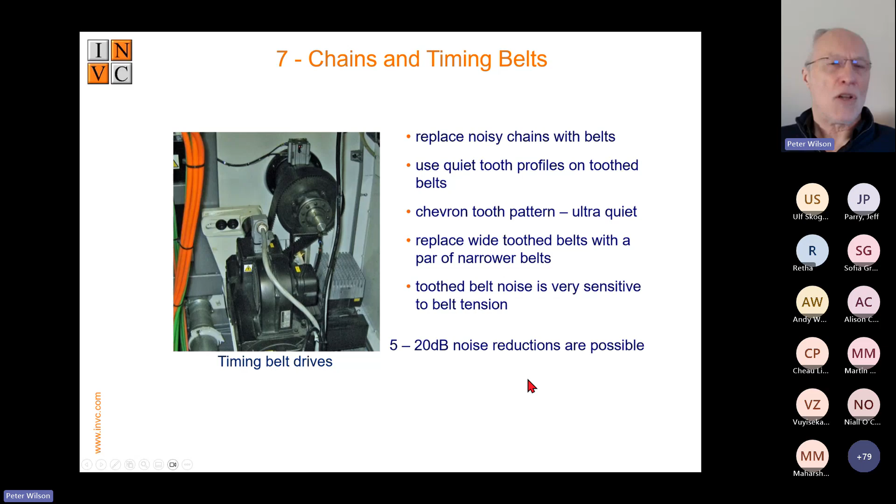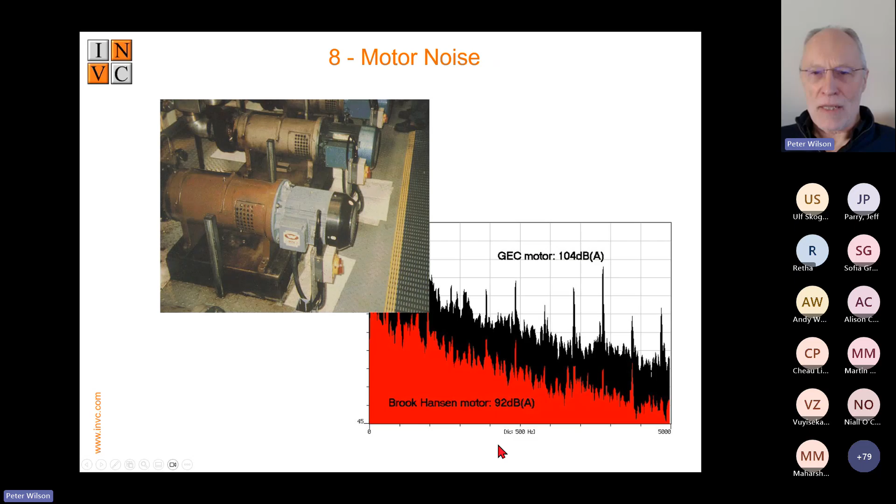Purchasing policy is another thing. These 2 oil pumps are doing exactly the same job. One of them generates 104 dBA at half a meter, and the other generates 92 dBA. Buy quiet motors.

Other organizations have fitted enclosures. I hate the idea of enclosures around pumps and hydraulic power packs, because you can't see leaks and the temperature inside will rocket. Now, the reason it's noisy is if you take your motor pump unit and suspend it in free space, it's quiet, but then you bolt it to an enormous loudspeaker called an oil tank.

And that puts the noise level up by between 10 and 20 dBA. So the trick is, all you need to do is vibration isolate this from the tank using rubber bonded cork pads and fit flexible connectors. There's no rigid connection between the pump and the tank.

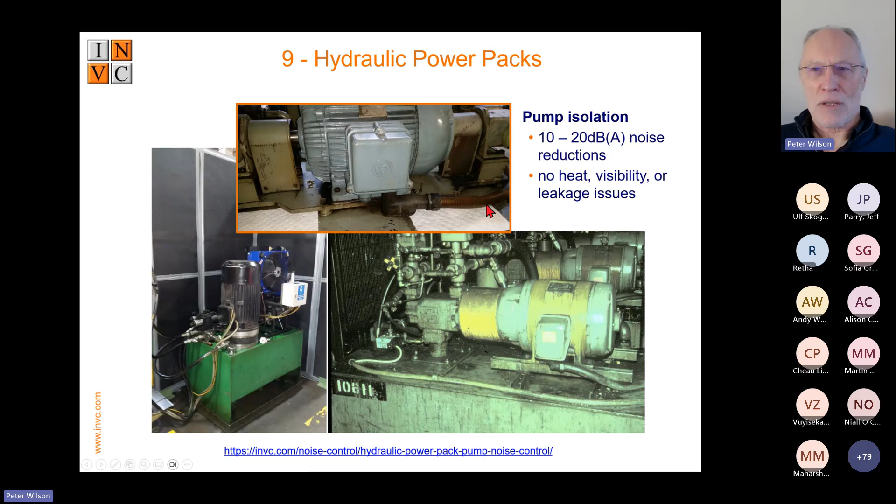If you need to have these aligned, this is on a frame to keep the alignment. In this particular case, you laminate this frame, and also replace this coupling guard with a laminated version. Doing that helps. But the other thing you do is then vibration isolate underneath, and you're talking about 10 to 20 dBA noise reductions, very cheap, and no heat, visibility, or oil leakage problems.

The other thing you can do is to improve existing guards. A lot of existing safety guards are not acoustically effective. So the first thing to do, if there are gaps around your guard, around the edges, at the joints between guards, or because of damage, if you halve the open area of these gaps just by fitting plates or flaps, you knock 3 dB off the noise.

If you can reduce the open area by 90%, you reduce the noise radiated by 10 dB. So reducing the gaps has a substantial effect on noise. That's the first thing to do.

The second thing to do is to fit acoustic absorbent inside the guards. It doesn't really matter where you fit it. You can fit it on the top, one side, or one edge. The more the better. But quite often you need visibility, so maybe put it on the top or the back. Fitting an appreciable area of acoustic absorbent will reduce the noise inside by around 5 dB. That means you've got 5 dB less forcing itself out through the cracks and gaps in the guarding. So it can be very effective in converting existing guards into acoustically effective guards.

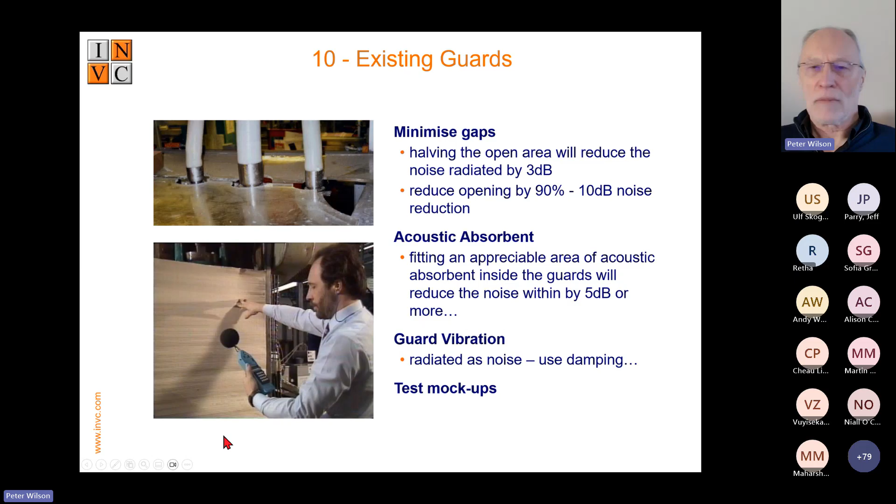And if guard vibration is a noise problem, in other words you've got thin steel guards, laminate them. Also, if you've got gaps, these are mesh guards in front of a press. Turn up with a piece of cardboard, measure the noise. How much reduction do you get if you cover that open guard and fit some acoustic absorbent behind it? You can just test that with cardboard in 15 minutes and it tells you the answer.

This graph shows you how much reduction you get depending upon the leaks you have. Along the x-axis is the potential transmission loss, the attenuation provided by the material you've made your guards from. Up here is the transmission loss you actually achieve. So if we take a steel, Perspex, or polycarbonate guard, it gives you 30 dB in airborne sound transmission loss. If you fit completely hermetically sealed guards, the noise will reduce by 30 dB.

If you have a 10% gap, 10% open area, the maximum attenuation you get is 10 dB. If you have 1% open area, the maximum attenuation you can get is 20 dB. At 0.1% open area, the maximum attenuation you can get is 30 dB. So it's very dependent upon the open area.

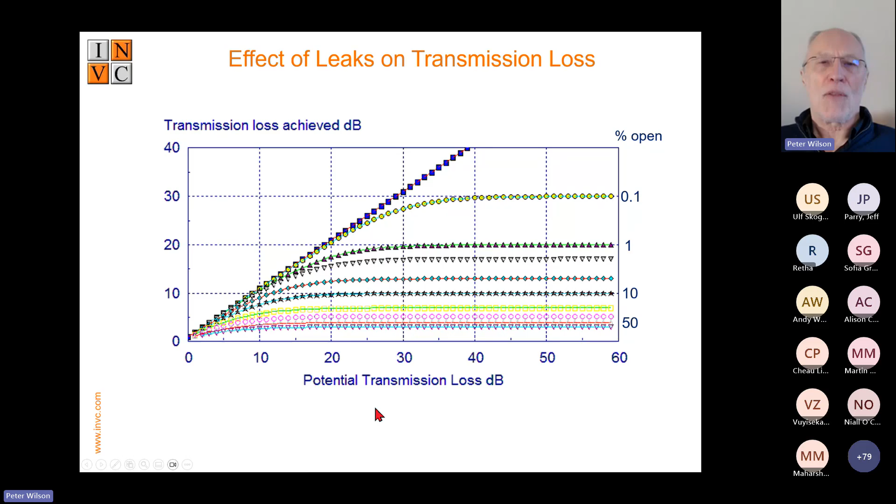Now we have the benefit of having developed a massive noise control database. And a very useful way of thinking about noise sources is to split them into two categories. Mechanical noise sources, which are caused by vibration, so you have machine guards, hoppers, impacts, weighing machines, chain drives, electric motors, electrical noise which vibrates, gear mesh, etc.

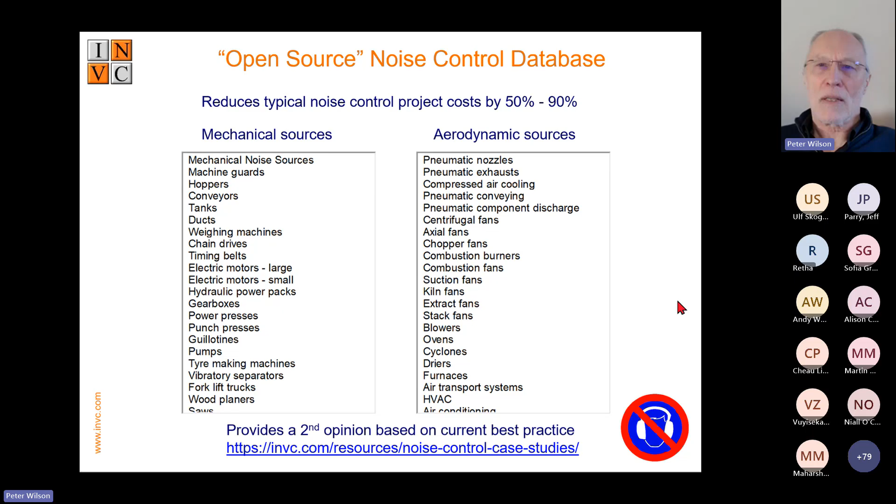You also have aerodynamic noise sources, such as pneumatic exhausts, cooling, conveying, component discharge, fans, and combustion, and so on. These generate the noise which is transmitted through the air into the open space. The mechanical ones are from vibration that's then radiated by mechanical parts of the machine. It's a very useful way of thinking, helping you work out what the noise sources are and what the options are.

So we have made our database online. We have dozens and dozens of case studies, a couple of hundred case studies on our website. So that's a resource. And at the end of this presentation, there's a list of resources from various organizations which give you noise control options.

So when we're looking at noise sources around the world, companies and organizations can send this data through our own database, and it's a free service. If you send us noise data, noise levels, reports of noise, pictures of each noisy item, and a smartphone video clip, we will analyze it, run it through our database and say we've got similar examples. There are these technologies. We may have a few questions about operation and maintenance hygiene and so on, and we can give you a very good idea of the noise control options.

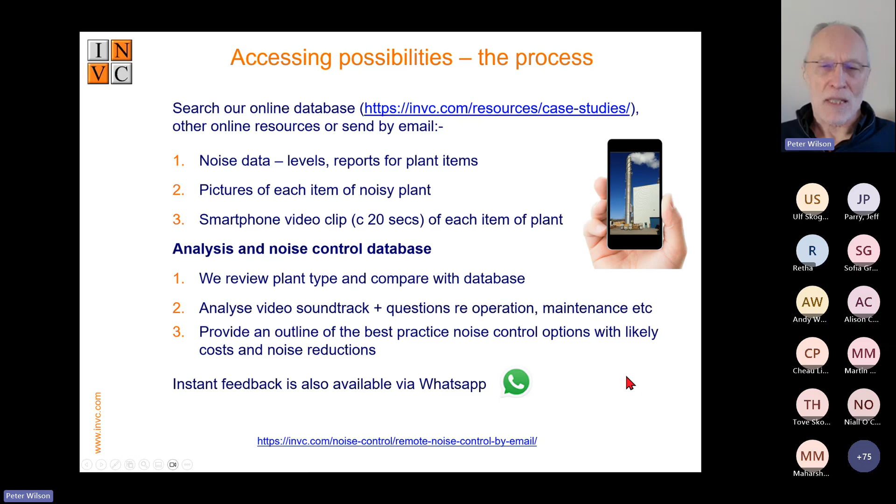And we can also make one of our engineers available via WhatsApp, so you can have a sort of engineering expert on your shoulder, on your phone, while you look at some of the plant that's key to what you want to reduce noise from. So the process is video, sound, photos, information from smartphone to us. We run it through our database and can give you an idea of the noise control options and the sort of costs involved.

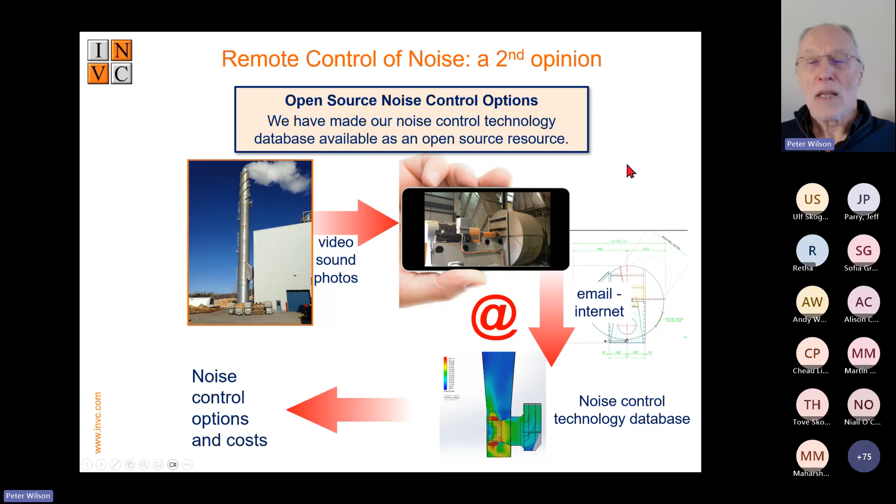It's quite useful if you get a quote for something horrendous like a massive enclosure and you're thinking that's going to cause all sorts of problems and it's very expensive. Might there be an alternative option? Take a look at the resources I'm going to show you later on online, or contact us with that. And we do this anywhere in the world.

The other thing you need to do is have a purchasing policy. There's no point making plant quiet if you then buy noisy plant in. And a purchasing policy can be quite simple. We've got some information on our website about this, but the key thing is...

If you just say to a supplier, we want to hit 80 dBA, they will sell you an enclosure, and the chances are that's not best practice. So what they'll do is buy in an enclosure, mark it up and sell it on to you. Whether that's best practice or not, they won't know because they don't have the expertise. Don't let your suppliers spend your money on noise control without close scrutiny and without them having proved to you that they've done the diagnosis, so you know what best practice would be.

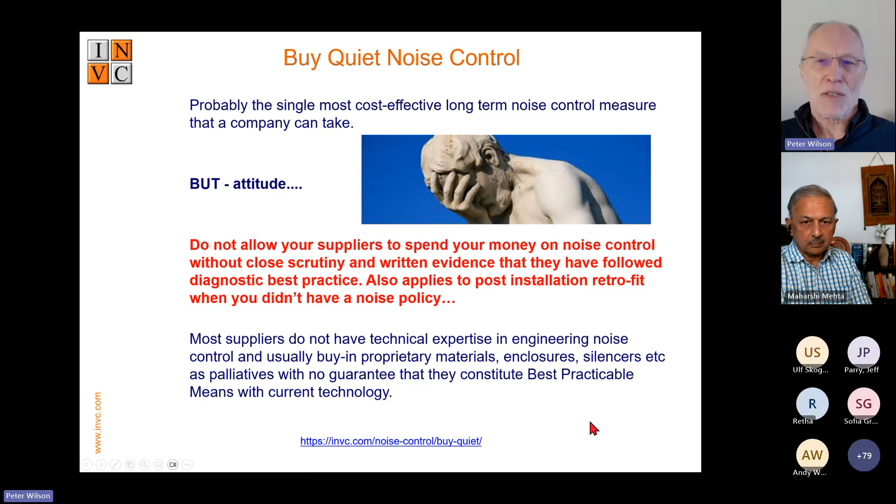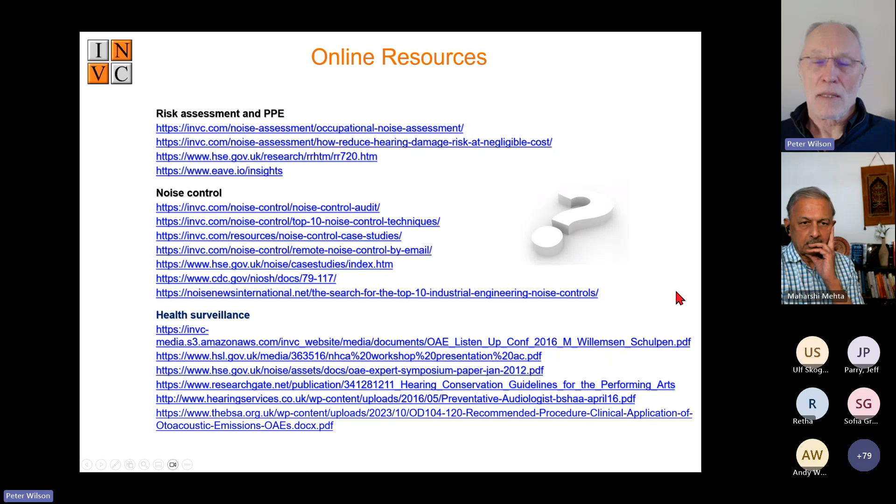So here are some online resources. And again, these are provided in this presentation, so you'll get a copy of this by email if you attended, and you can then check on some of these. They're resources from various organizations across the world.

So I think the key things, the key elephants in the room. Let me go back to a previous slide, a summary slide. As far as reducing risk is concerned...

Oops, I'll get it right in a minute. It's a live show, folks. Sorry about that. There we go.

So I touched on risk assessments. They never contain anything about noise control. Try and make them useful. They should provide you with an action plan to reduce the risk.

Hearing protection: if you're above 90 dBA, you're in trouble, because in the real world, as measured, you're lucky to get more than 5 to 10 dB attenuation. If you need more than that, you have to be incredibly careful and work very hard at it. There is some new intelligent hearing protection on the market now, which can tell you the wear rate and the noise level inside the hearing protection, so you can investigate that as well. It's very new, so it's not generally available yet - available in the UK and a few other places, but not generally.

Audiometry - I would suggest trying to switch to OAE if you can and if it's available. But with noise control, if you can reduce the noise, you can get rid of the problem. Even if you can't reduce it below 85 or 80 dBA, you can reduce it enough that hearing protection will work easily. So if you can get down below 90, hearing protection can be made to work quite easily; above 90, not so much. And noise risk is directly proportional to noise level. So if you can cut the noise from 97 down to 94, hearing protection is still required, but you have halved the risk.